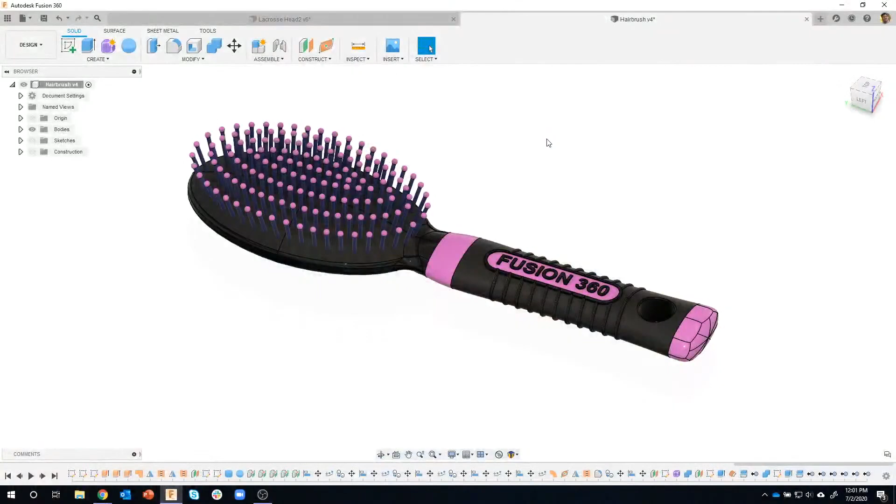So I'm going to be going through and showing some tips and tricks on how you can use pattern on a path. Now, I'm not going to be able to do the whole brush today. I'm going to focus mainly on the head, but just taking a look at the handle right now. Pretty simple shape, kind of an elliptical shape. You can tell I used a free form to connect to that.

And I'm actually basing this off of my wife's hairbrush. Hopefully she's not missing it right now and comes looking for it. But anyways, let's dive right in.

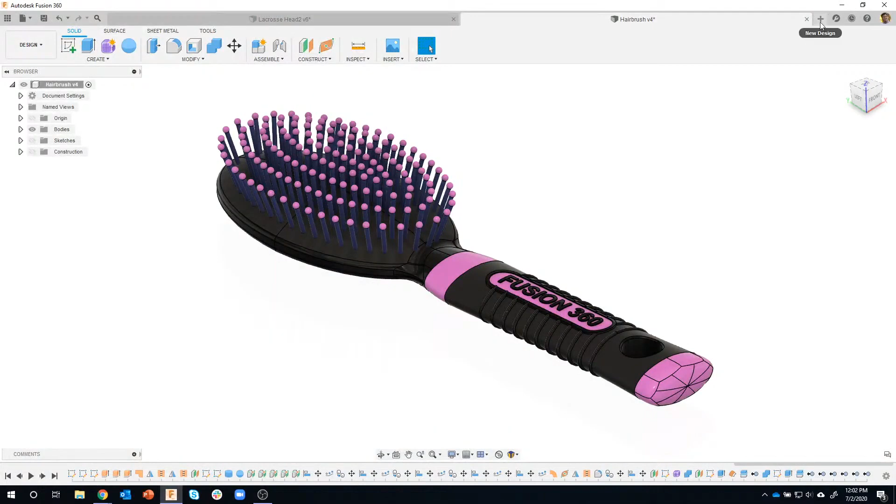So I'm going to start by creating this curved surface. It's a little hard to see because of the black, but I'm going to start by creating this curved surface. And then we're going to use that curved surface to help us define the direction of these pins. I'm going to call them pins. And you can see how they're perpendicular to that surface. And that's kind of the cool thing with today's project.

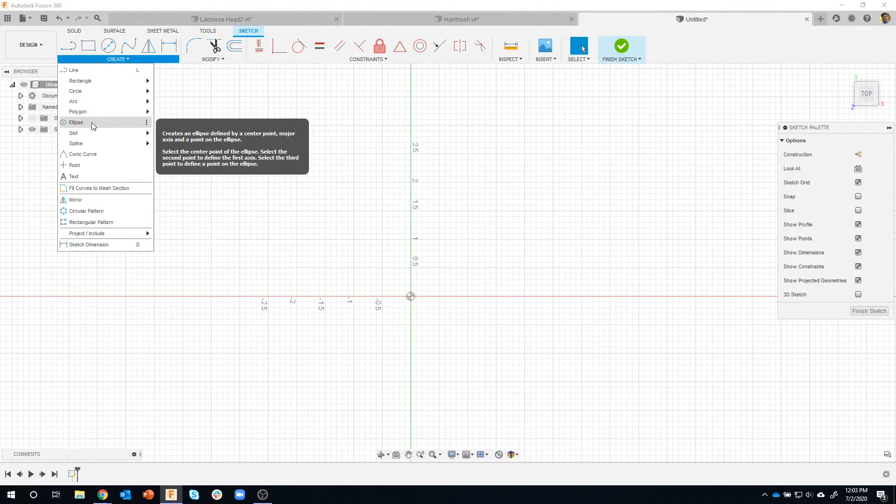Okay, so some of this is going to be similar, some of it's going to be new, but I'm going to start out by creating a sketch. And I'm going to start with an elliptical shape. Now, I don't use ellipse all that often, but in this case, the shape of the brush is an ellipse. So I'm going to start with the ellipse command, and it says place the center point. So I'm going to start here, and then it's asking for either the width or the height.

I'm going to go ahead and do the height, and according to my measurements, it's 4 1/4 tall. Then I'm going to hit the tab key, and you'll notice even though my cursor is way above this, it's basically asking for the angle of this ellipse. So I'm going to just click up here so it's vertical. And now as I move my cursor to the right, you can see there's the overall length of it. And now I can say it's 2.5 inches wide. So let me just move a couple of these dimensions so you can see what's going on here. So I created an ellipse, 4 1/4 tall, 2.5 wide.

Now, with this project, we're basically going to be working in one quadrant and then mirroring a couple times. So I'm only going to work in one quadrant. You'll notice that this is all one spline, or in this case, an ellipse. So I'm going to create some geometry that's going to help me split this apart. And you've seen me do this before. I purposely over-exaggerate. Instead of trying to draw a horizontal and a vertical line, I'm just going to do something like this. That way, when I come in and constrain it, I can visually confirm that everything's correct.

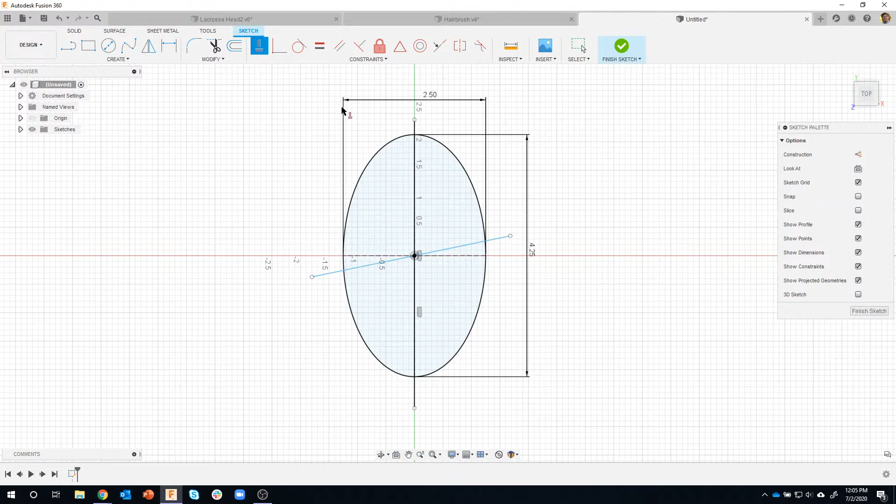So, for example, I want that line to be coincident with my center point, and I can visually see that it jumped to the center point. Same thing from there to there. I can see that it's now going through that, I shouldn't say center point, I should say origin point. Then I'll come in here and say horizontal, vertical. I'll click on that line and I can visually see that it's now vertical. Click on that line, I can visually see that that's horizontal. You don't have to do it that way, but to me it's confirmation that it was done correctly.

I can also see, if I expand my sketches, that these lines are black. And that means that they're constrained to the origin, for example. So I'm going to change these to construction geometry. Let me just make sure I get that line there. So now you can see that those are construction geometry.

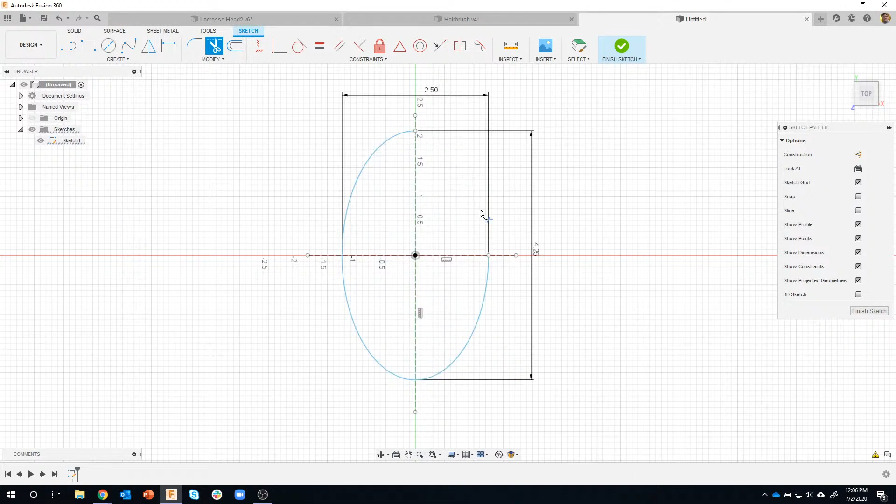Okay. So like I said, I need to split this, or we use the term break. I need to break this into quadrants. So under the modify command, there's a command called break. Now trim physically removes geometry. So if I came in here and said trim, it's going to physically remove that section. What break does is it just basically breaks it.

And you'll see, it's kind of hard to see, but as I hover over, you're going to see a little red X up here, and you're going to see a little red X over here. So I'm clicking on this segment, and notice it warned me that by doing that, we're going to lose some of our constraints, but that's okay. But now you can see that this is its own segment. If I come over here, you can see that it's 3/4 of a segment.

And what this did when I said break, it went to the next intersection basically, which is right here, and it broke it at that intersection, and it broke it at this intersection. So same thing right here. I'm just going to hover over this line. You can see the red X appearing in this area here. So I'll click, and I now have 2 segments.

So we're basically breaking it. You'll notice it's still a valid profile. I'm not trimming anything away. So I'll go ahead and break that segment there. I don't need to break this one because by breaking it here and by breaking this one up here, it became its own segment. Okay, so that was the break command.

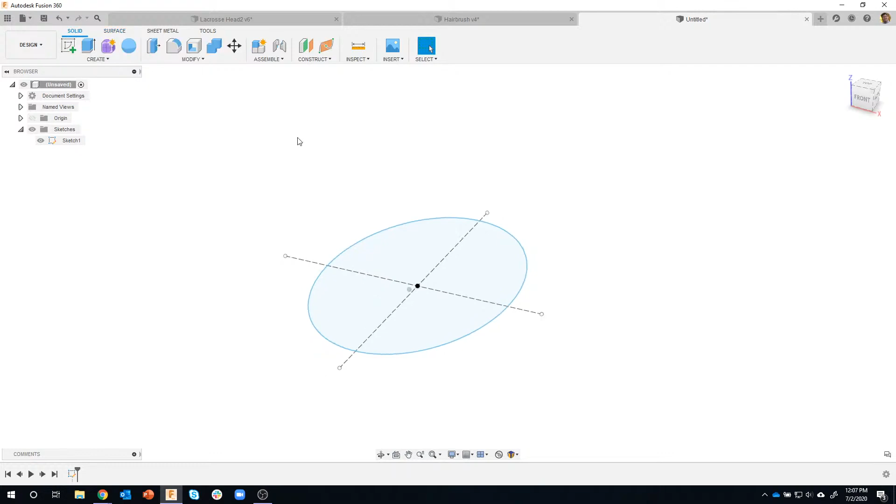Okay, so I now have the overall shape of basically the head of the brush. Now I want to kind of create the curvature. And to do this, I'm going to use surfacing. But I want to create some geometry that's going to help me create a nice surface. So I'm going to continue drawing some geometry here. So I'm going to say, let's create a sketch on this front face.

Okay, now here is where 3D Sketch really helps out. And let me show you why. I want to create a spline. So I'm going to go spline, and you'll notice that it's not snapping or catching to this profile because I haven't projected anything. There's nothing on this sketch. You'll notice if I turn off my original sketch, there's nothing there. So that's why it's not catching to it.

However, if I turn on 3D Sketch, it doesn't instantly put me into 3D Sketch. So here's one of my tips. I turn it on, I'm going to say Finish Sketch. Then I'm going to edit that sketch again, and you'll notice it's turned on. And now when I do the spline, you see this triad icon that appears, and that's a visual confirmation that I'm in my 3D sketch.

But check this out. Now notice it's actually snapping to this spline. Okay, I didn't have to project anything or anything like that, but 3D Sketch has some smartness built into it. So I'm going to get near this point, and you can see it turn to a square. So I know I'm at that end point right there. So I'm going to click there.

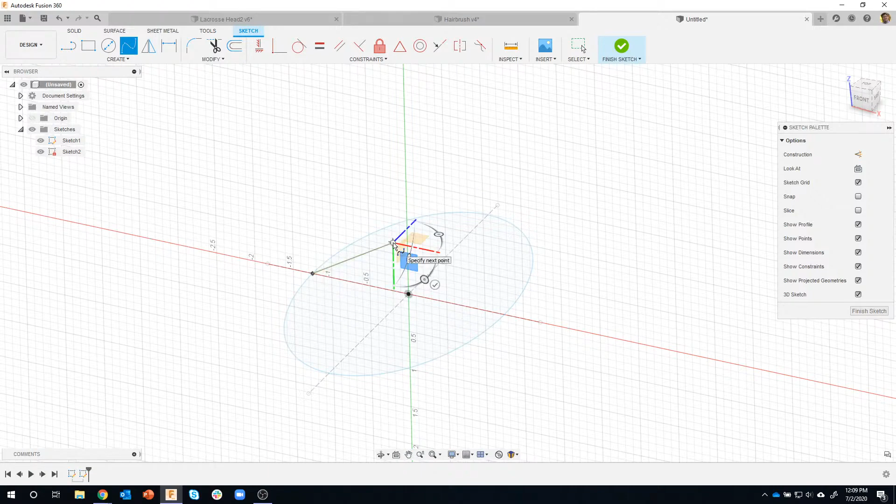And then I'm going to come over here, and again, you can kind of see it snapping to that edge, but I'm going to make sure I see that little square, and I'm going to go ahead and click there. Okay, and I'm going to say that I'm done. So what did it do? Well, it created a flat spline. I'm kind of looking down at the top of it on that plane, exactly from the edge there, exactly to the edge over there.

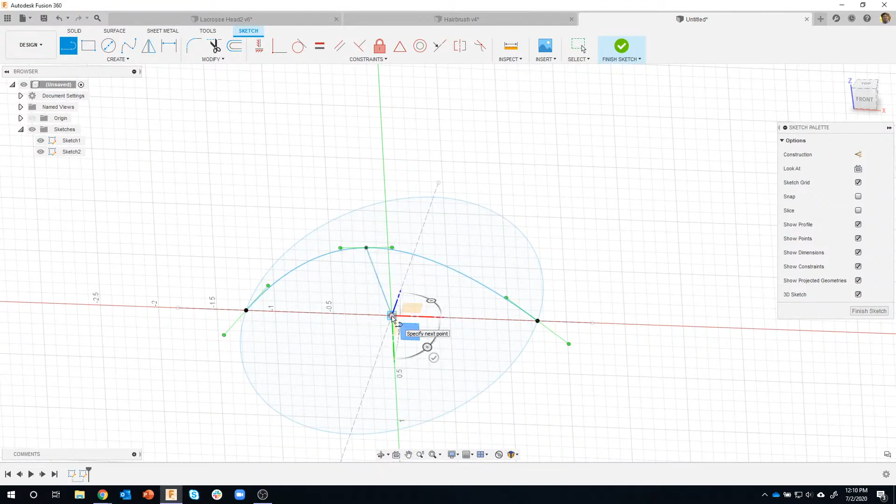Now I want to make sure that this point is straight up and down, so I'm going to use the line command. I'm just going to go from that point there to that point there. Okay. Done. Then I'll constrain this. I'll say I want that to be horizontal vertical, and watch what it does. See how it kind of moved over and that line is now vertical.

Now this is a pretty steep curvature to the surface, so I'm going to throw a dimension on here. Again, this is all just taking measurements off of the existing brush that I had, so this is supposed to be 0.35, and watch what happens to my spline. So you'll see it still is touching those corners, but it's now kind of more of a slightly crowned curve, okay?

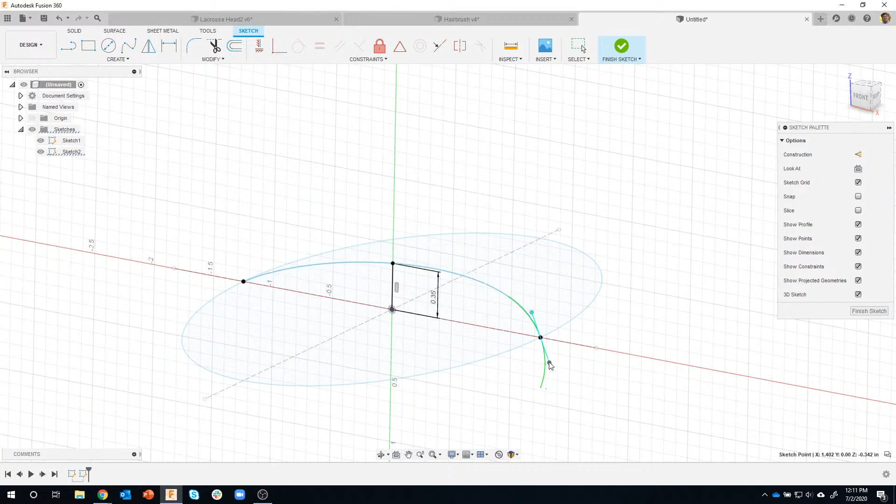Now these green handles here allow me to change the tangency direction and the tangency weight. You can see how this one slopes gradually to that point, but this one comes across and then steeply goes down. So you can control the weight, which is how strong the tangency condition is.

And believe it or not, you can actually dimension, for example, from this edge to this edge, and say I want that to be 45 degrees if you wanted to. In this case, I'm not going to. I'm going to leave everything just default, the way it was. Let me make sure, undo.

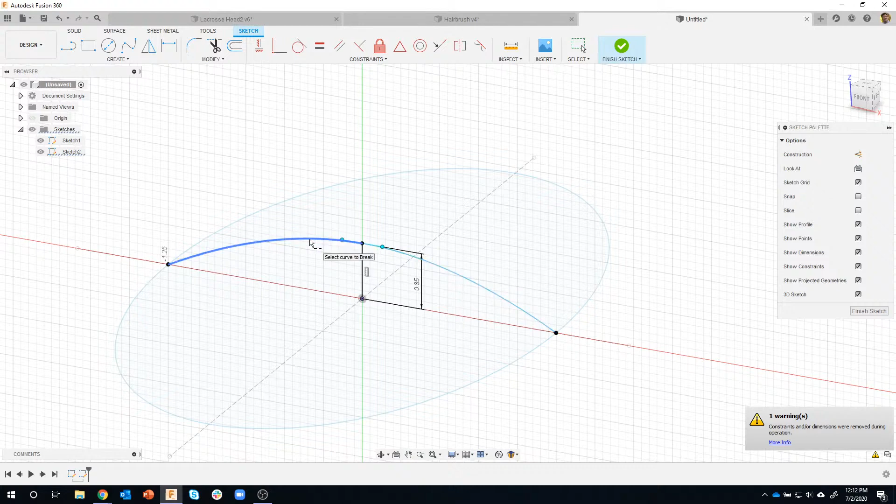Okay, so I also want to split this spline, because you'll notice it goes all the way across, and like I mentioned, we're only going to be working in quadrants. I should quit using the term split, I'm going to say break. I hover over this line and you can see that little red X appear, so I'll go ahead and click that. I've now broken this spline into 2 segments.

Okay, so that's going to define the curvature in one direction. I also want to define the curvature in this length direction, so pretty much the same thing. I'm going to create a sketch on this front face.

I'm in my 3D sketch, so what I can do is come over here and you'll see it turn to like a square, so I'll go ahead and click there. Now I do want to make sure that I catch this point right here, so I'm not going to randomly go somewhere else. I'm going to go there and click, so my spline will go through that point. And then once again, I'll come over here, wait until it turns to a square, and say OK.

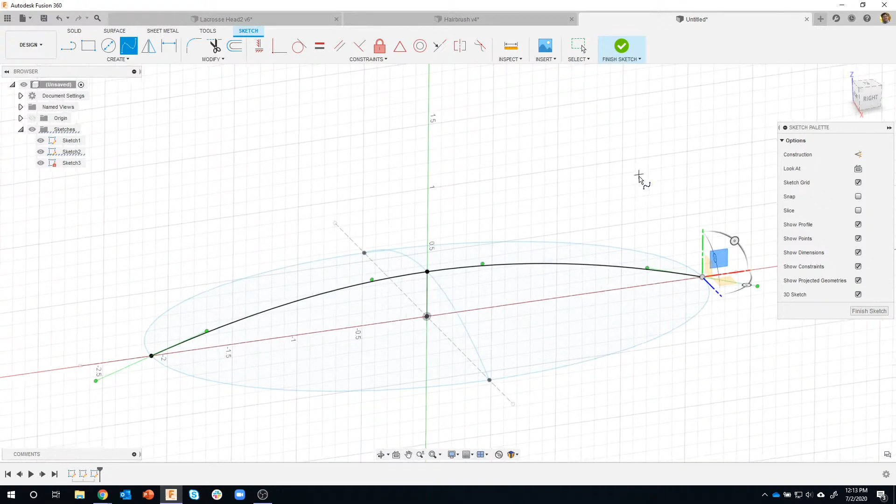Okay, now I need to break this spline, so I'm going to come in here and say break. But watch what happens when I hover over this line - I do not see the red X.

Okay, so I'm going to do something a little bit fun here. Pop quiz: if you think you know why, throw it in the chat real quick, you don't have to be lengthy. Just, why do you think the red X is not appearing when I'm doing this break? I'm going to pause for about 10 seconds here, let you guys throw your answers out there. Does anybody know why it's not letting me break this?

So Al said no point at the top. Joel said there's no intersection. Fred said it's a bug - nope, it's not a bug, I can prove that. Joseph said, I always make the mistake of clicking and not escaping after the spline. Angelo says he knows why. Chris, I'm going to give you the gold star for the day - he said vertical line is in a different plane. Somebody else said because it's in the other sketch. You guys are too smart, you shouldn't be watching my live streams, you know all this. So that is exactly correct.

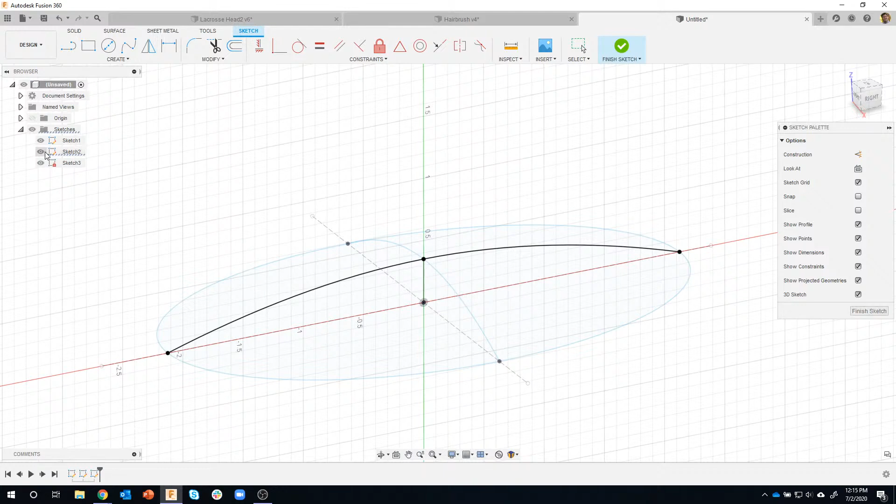Let me show you what's happening here. So I'm trying to break this line, and I see this line right here, okay? However, that's on a totally different sketch. In fact, if I turn those 2 sketches off, you'll notice there is no line right there for it to use to break. So yes, you guys are absolutely correct.

There was no intersection point, nothing for it to stop at, because break basically goes to the next boundary, and there wasn't one because it was on a totally different sketch. So the next boundary is way over here, so there was nothing to break. So yes, you guys are awesome.

So how could I do this? Well, let's just go ahead and project onto this sketch that line. So we're basically projecting this line from sketch 2 onto sketch 3. Watch, I'm going to go ahead and click this guy, I'm just doing the selected entities. I'll say OK, and now if I turn off those 2 sketches, I now have a line or a boundary.

Okay, so let's see what happens if I try the break command. I like James, he said it was a human bug - yep, it was my fault because I hadn't projected it. So human bug. Now notice I'm hovering over this section and there is that little red X right there, so I'm able to break this into a separate segment.

Now, why am I really highlighting this? This happens to me a lot, and I also take quite a few calls from customers where they're like, I go to extrude and half of my geometry isn't a valid profile.

It's because it's actually on a different sketch and they didn't realize they had created a third sketch or something like that. And when they go to extrude, sketch number 2 and sketch number 1 aren't active and they're not being extruded. I highlighted this because I run into this a lot too.

Okay, so I'm going to go ahead and finish the sketch there. So what have we done here? We've basically started to create what almost looks like a surface so far. These are the wires, like if you were making this out of fabric, and these were just thin pieces of metal, you could lay a piece of fabric over this and it would create a nice looking surface.

Okay, so I'm going to switch into the surface tools. Now I'm going to show a couple tips. Some of these tips are from one of my coworkers who's really good with surfacing. I'm not much of a surfacing person, so I'm going to pass on these tips and show you why, but I'm not going to go into too much detail because mine's more about pattern on a path than it is about creating surfaces.

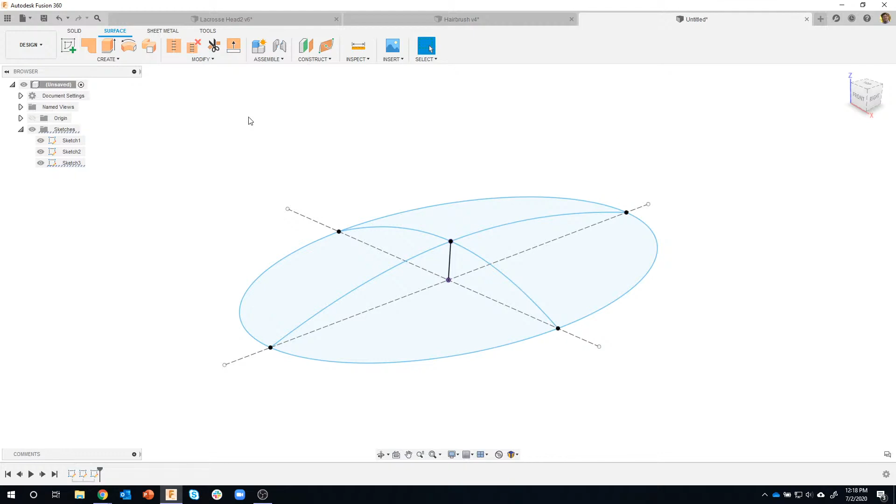But let me show you an example here. I'm going to come in here and say create a patch. It basically allows me to specify a boundary and it's going to fill in. So watch, I'm going to say patch. Notice because we've split this, I can click here, click there, and click here, and I get a surface. It's like a piece of paper or piece of fabric being created by those 3 lines.

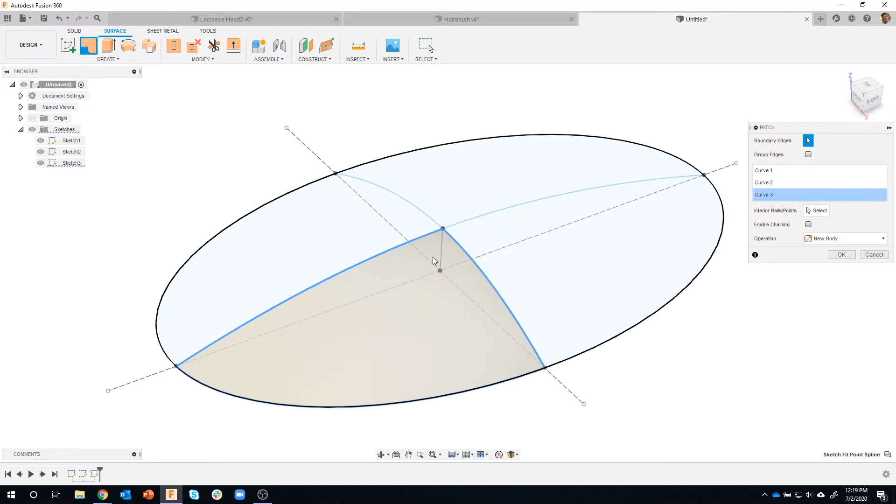I could even specify an interior rail if I wanted to, but the key thing I wanted to point out here is notice it says curve 1, 2, and 3, but there's no options here. It's literally just filling that area in with a surface, with some material or whatever. So keep that in mind. I'm going to cancel out.

So here's the trick that he showed me, which I think is pretty cool because it gives you more options. It takes more steps, but it gives you more options. I'm going to come in here and say extrude. Now watch what happens when I hover over this edge - it highlights the whole edge. And you're probably saying, well, didn't we just spend 15 minutes splitting those edges or whatever?

Well, it's because this chaining is turned on. So I'm going to turn chaining off. And now you'll see it's its own edge. I'm going to grab that edge and just drag it some random distance - it does not matter how far. I'm just going to extrude that edge back. Now if I expand open my bodies, you'll see there's a little surface right there.

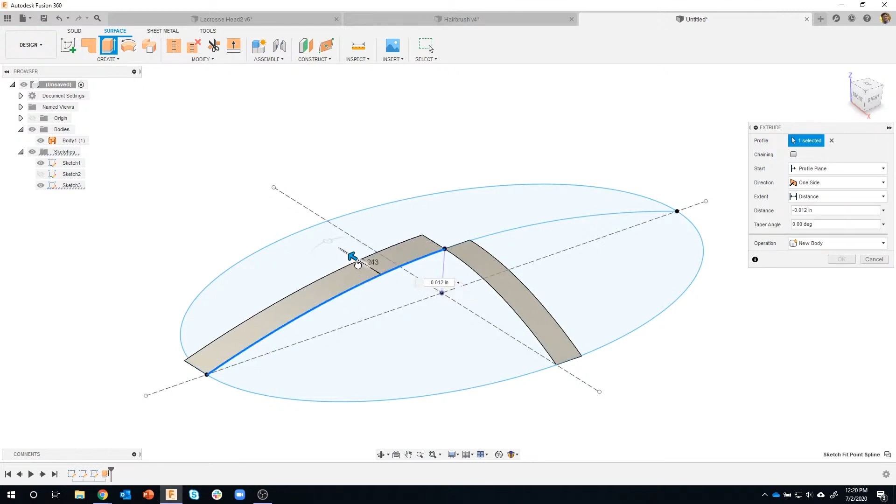I'm going to continue doing that with these 3 quadrants, these 3 edges. So I'm going to extrude an edge back that way. And then I'll also turn off my chaining, extrude this edge down. So what did we do here? Well, we basically created some kind of a boundary, but now there's surfaces that are going to be touching that. So watch, I'm going to do the exact same command.

I'll come in here and say patch. Okay, what are my boundary edges? So I'm going to say that edge there, and this edge here. Now notice they're labeled - even though I clicked this one last, it says this is edge 1, edge 2, and edge 3. And it looks pretty similar to what I created earlier, okay, but notice the options that I have.

So edge 1, I don't want to mess with. In fact, I'm going to purposely mess with it to show you what these options are. It says connected, so there's G0 continuity. It basically means this surface is touching or connected to this surface, okay.

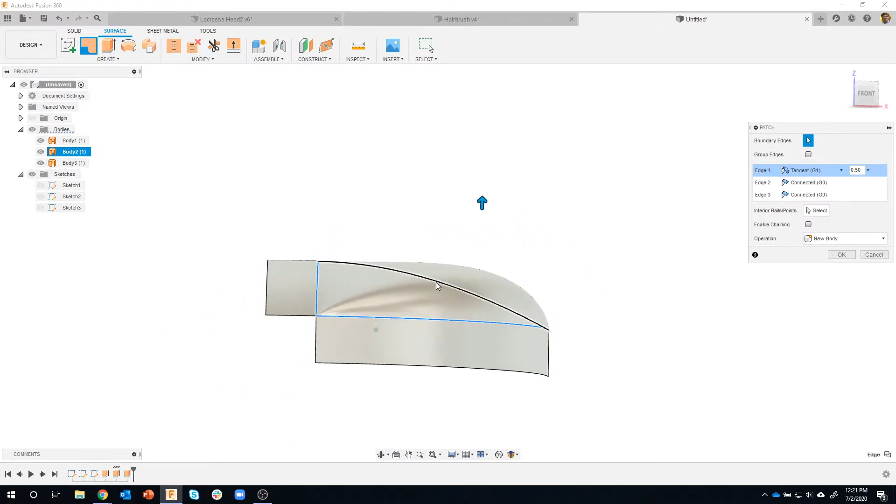Well, if I came in and said, you know what, I want to make that tangent, look what it does. In fact, I'm going to rotate to the side. You can kind of see it's really having to modify the shape of this, but it's basically taking that surface and making it tangent to edge 1. So it gives you a lot more power.

So for example, I could say I want edge 2 to be tangent, and you can't really see much happening, but what it's going to do is smooth this out and end up being tangent with that surface. Whereas when we just did the 3 edges by itself, there was no tangency control or connected control or curvature or anything like that. And you can see you actually can change the weight of this if you want to.

So I could come here and make both of these surfaces tangent, and it's going to create a much nicer looking surface for us.

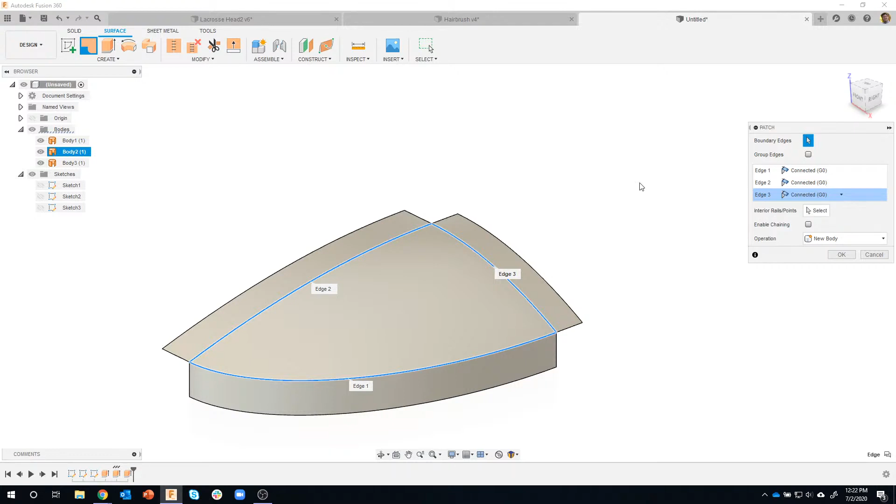Now in this example, I'm just going to leave everything connected. I don't want to worry about tangencies or anything like that right now, and you'll see why in a little bit. But I wanted to highlight that because Jeff Smith, who's on our team, showed me this, and I thought it was a really cool tip.

Okay, now you'll notice I have all 4 of these bodies. I'm going to turn off the ones I don't need, and so I'm left with this one little patch, basically. Well, because everything's kind of symmetric, I could come in here and say mirror.

What do I want to mirror? I want to mirror that body. What's my mirror plane? Well, because I created everything at 0, 0, I can select this vertical plane right here, and you'll see it's going to mirror along that plane.

But watch what happens over here when I say okay. It is now 2 separate bodies. I want to stitch these together.

Another tip that Jeff gave me was stitch as you go. So instead of doing all 4 of these and then stitching them, he recommends stitching as you go. So I'm going to go ahead and say I want to stitch that surface to this surface. We're basically sewing it together.

You notice how the edge turns green. It obviously can't stitch these outside surfaces, there's nothing for it to stitch to. So I'm going to stitch that together, and you'll notice we're back to 1 body.

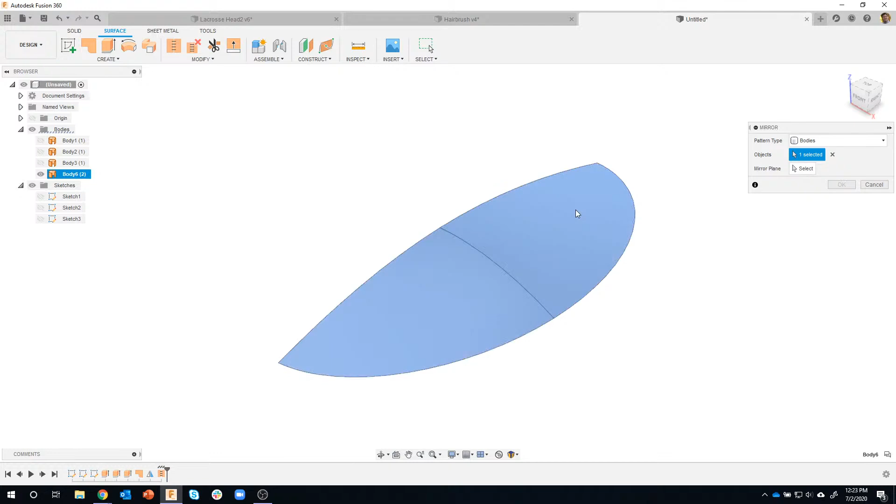Then I'll go ahead and mirror this one more time. Notice it's 1 body. What's my mirror plane? That guy there. I'll say okay. We'll stitch that one to that one. You can see the green line, which is good. And we are back to 1 surface body.

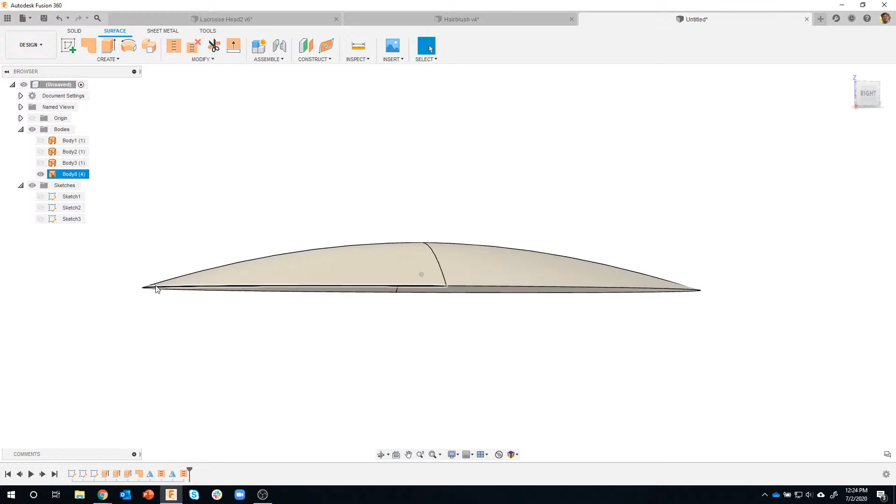Now, I told you earlier I don't care too much about the tangency conditions or anything like that, because we're basically doing pins along a path. If I were building this as an actual surface, I would probably spend more time with the tangencies, and might control the angle that this slope comes into this edge, etc. But that could take a whole session just on surfacing, so I'm keeping this fairly simple.

So the next thing I want to do, now that I have the basic shape to put all of my little pins, I need to create some paths for those pins to follow.

So I'm going to do an offset plane. I'm going to offset this horizontal plane, which is way down here, and just bring it up some distance. It doesn't matter, I'm just making it above my object. And then I'm going to create a sketch on that plane.

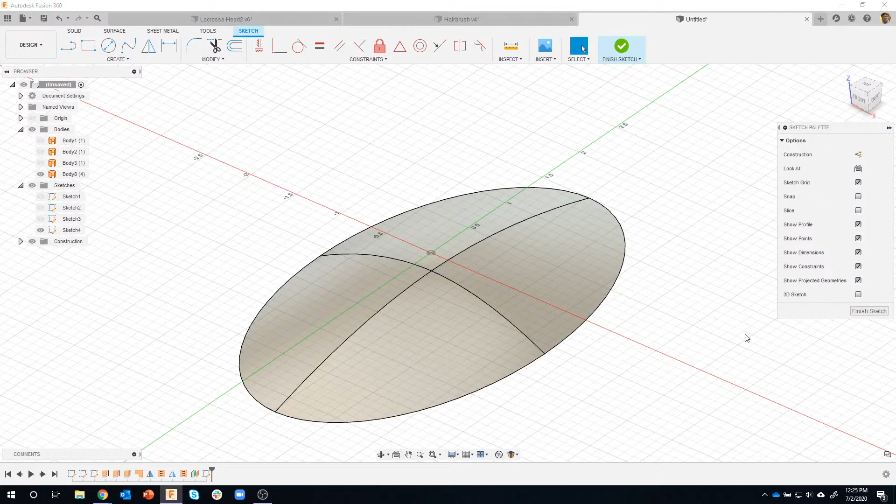Now you'll notice my screen did not go orthographic like it usually does, and that's because I'm still in my 3D sketch. I'm actually done with what I need 3D sketching for, so I'm going to turn that off. You'll notice nothing really happens, so I'm going to say finish sketch. I'll come back into that sketch, and now you'll notice it's orthographic. It's not going to have that triad anymore that gets in the way that you usually see with 3D sketch.

Okay, so I want to create some equally spaced elliptical paths for these pins to follow. So I'm going to project, P for project, and you'll notice right now it's on specified entities.

So I could project each quadrant, or pick this edge, then this edge, then this edge, but that would take some time. Or I could say bodies and watch what happens—it's going to basically do like a silhouette of the whole body. So when I click on that and say OK, it projected all of those edges for me in one click, instead of me doing it manually, click after click after click.

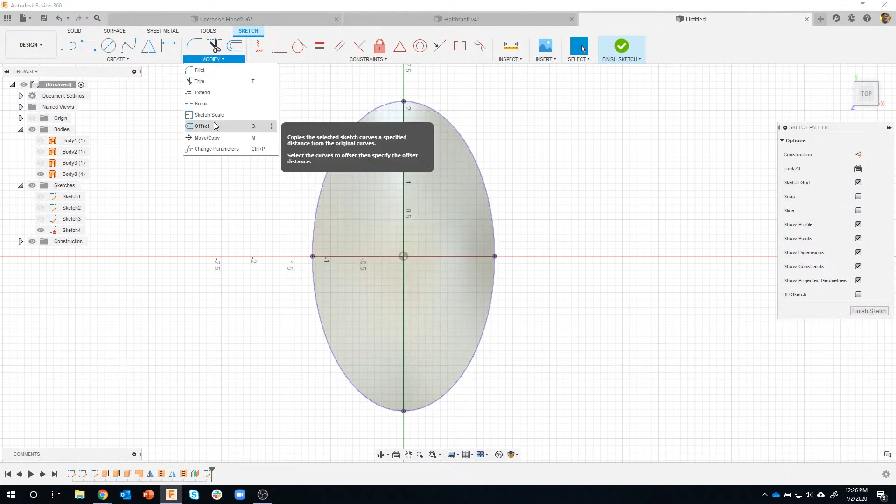So that was this bodies option in project. By default, it's usually set to specified entities. Okay, cool, so now I have this shape. I'm going to use the offset command in Fusion.

What is the sketch curves? Notice it's all one curve. I want it to offset in 0.25, let's say a quarter of an inch. And you can see that sure enough, it offset that ellipse a quarter of an inch.

You can't use pattern to do this, so I'm going to use offset again. You'll notice if I try to offset this line, it says one or more of the curves has already been offset, consider offsetting the original profile again. So this is something with Fusion: you can only offset the original. You can't offset an offset, or offset two offsets, or whatever.

So I'm going to offset this guy, and I'll say let's go 0.5. You can see I get that result. I'll click on here again and say let's go 0.75.

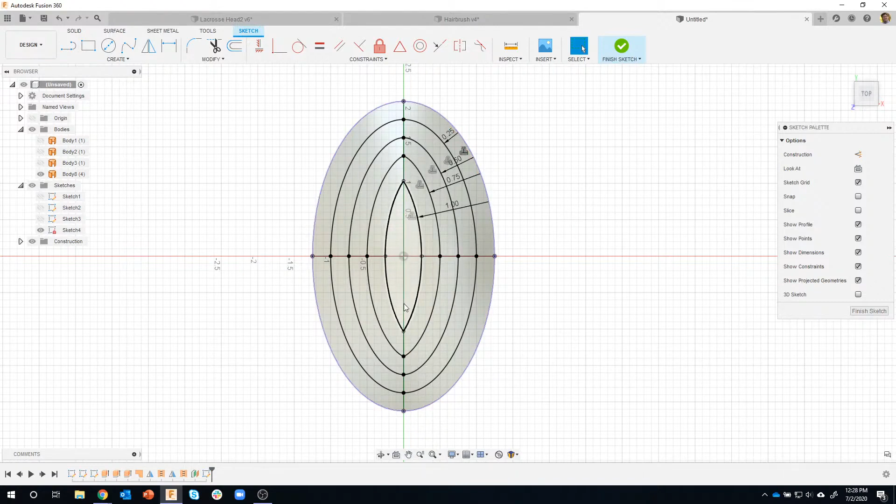So I'll come in here, let's do this one, I'll offset that one. And then there's a row that's just a single line basically right here. So I'm going to draw a line, again kind of some weird shape like so.

I'll make it vertical, and I'm going to say I want the midpoint of that line to be at 0,0. So now if I were to change the length of this line, you can see how it's constrained and it's equal and all that kind of stuff. So I just created a line, made it vertical, and then made the midpoint be right there at the center.

Okay, so if I rotate this now, you can see that we drew all of these on a flat plane above this surface. Now there's a really cool command in project. We usually use this project right here, but notice there's one in here called project to surface. Now I'm going to purposely make a mistake here because this happens a lot.

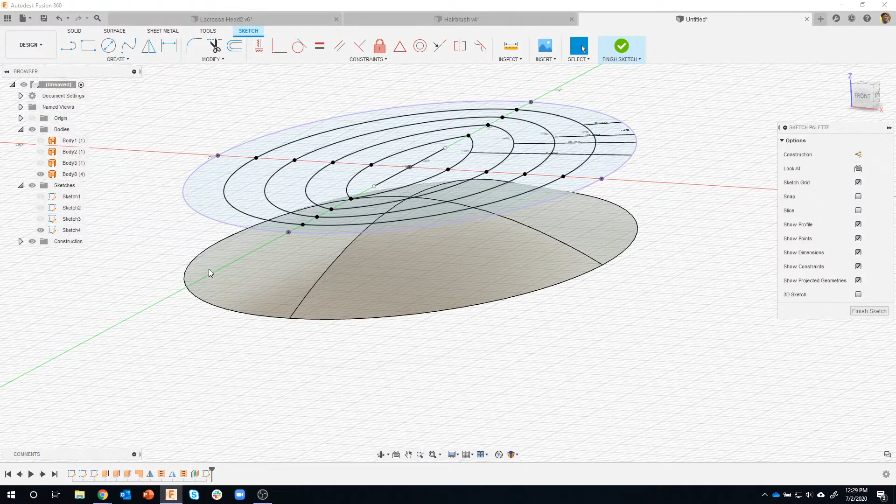You might get this error message, and I'm going to explain what it means. So I'm going to say project to surface. It's asking what face, so I'm going to go ahead and select one face. And then it's asking for a curve, and I'm going to go ahead and click on this curve.

And then finally, notice here's the warning: no support for projecting sketch geometry into the same sketch, please change the target sketch or geometry. When I first saw this, I'm like, what does this mean? Well, basically what we're trying to do here is we're using this geometry and we're wanting to project it onto a surface here.

So what it's saying is you can't project this onto the same sketch. So I'm going to say finish sketch. Then I'm going to create a new sketch, and it doesn't matter where. I'm going to again click on this bottom plane, it really doesn't matter in this case.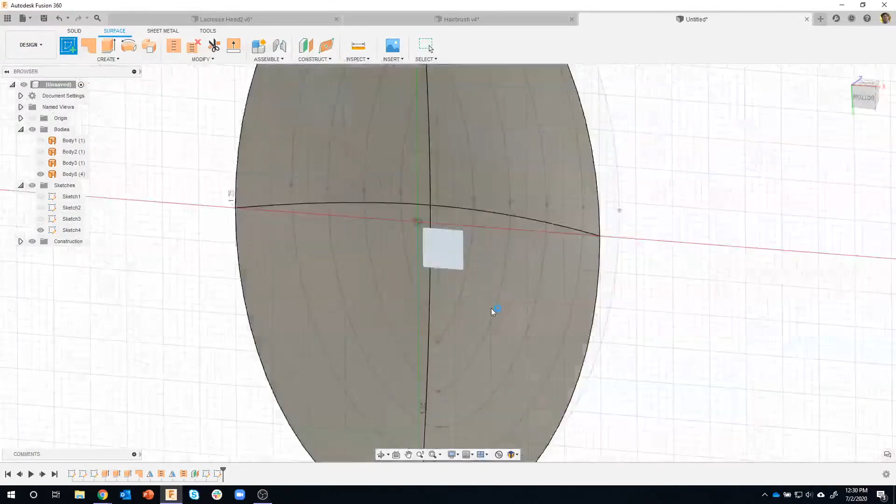Then I'm in my sketch. You'll notice I now have two sketches: sketch 4, which is all of these little rings, and then sketch 5 is this new one. Now I'm going to say project to surface. By default, it's usually set to closest point.

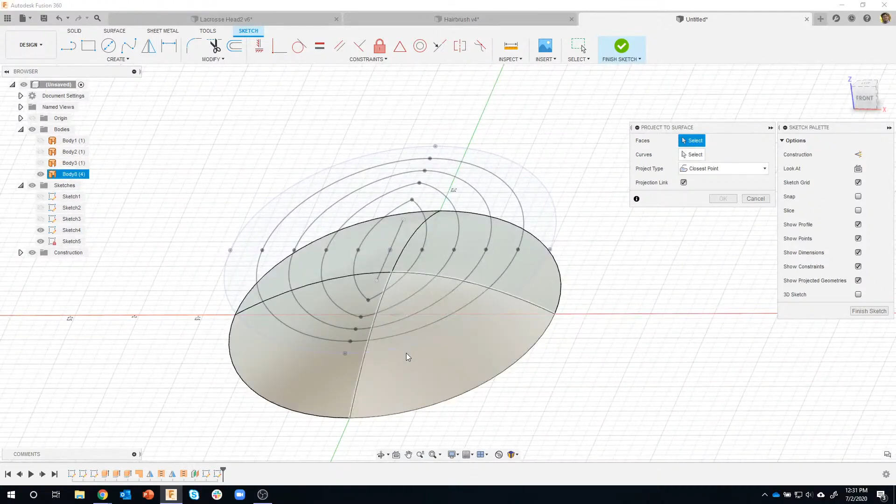Now that works great if your stuff is planar, and what that basically means is it would take this curve and try to get it to the closest or shortest distance to that surface. So that could be, it's hard to point out, it could be in this direction here, it could be in this direction here, who knows. Well, I want to basically project this down, almost like we're wrapping it onto the surface.

So I'm going to change my project type to along vector, and this is going to allow me to specify which direction. You'll notice it says project direction, and I can click on, let me zoom up here just a little bit, this vertical axis right here, this blue line. I'm going to click on there, and you can kind of see it gives me an arrow preview that the lines are going to project in this direction until they hit a surface.

So what are my faces? I'm going to click these 4 faces. What are the curves? And check this out, I'm going to go ahead and click on that edge right there, and you can see that sure enough, it projected it straight down onto this curved surface.

So I can go ahead and click around so you can kind of see, I'll do that, and I now have a ring. Let me look at it from the top. You can kind of see it follows that path, but it's on the surface of this part right here.

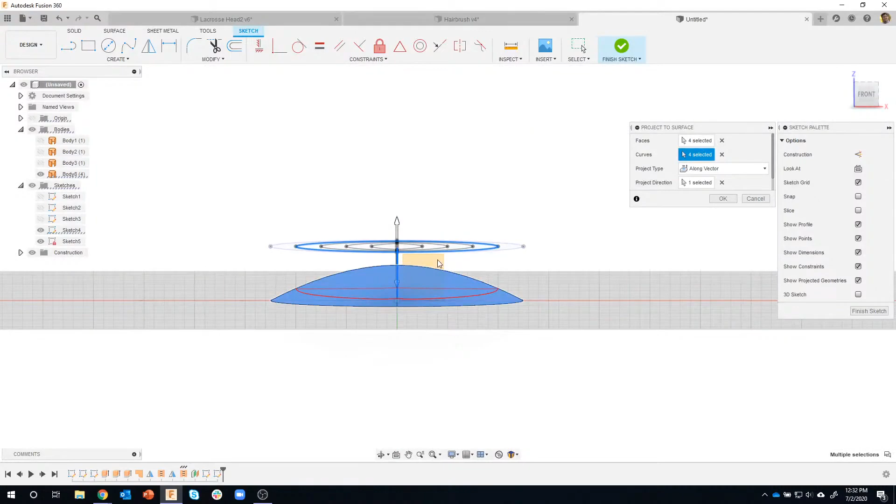And you can kind of see how it changes as it goes around that surface just due to the length and width and stuff. So I'm going to go ahead and continue. I'm going to click around. And again, because these are split, that's why I'm having to do these in 4s basically, but I do need the full path. Okay. So I got that guy, so I need to do this guy, that guy, and this guy, and then finally that line through the center.

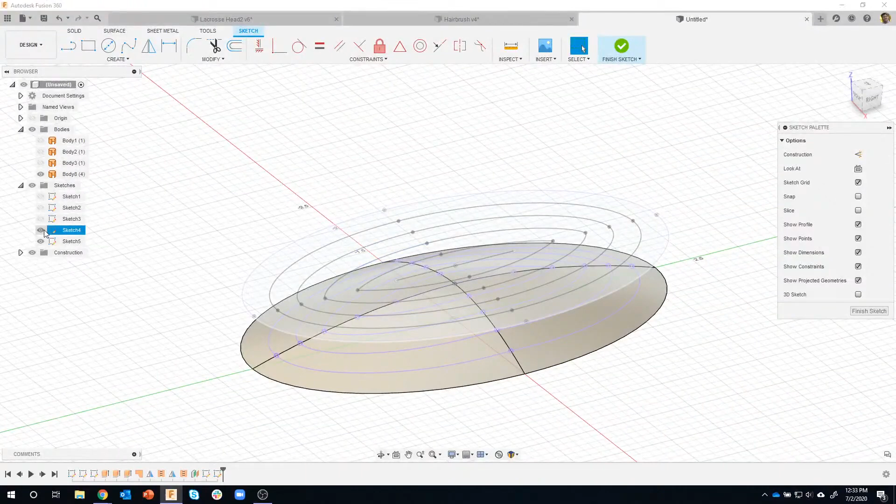And now you can kind of see the curvature of this. They all match looking down from the top. Pretty cool. Okay, so I use that along vector a lot. It's a pretty neat project to surface along vector. Okay, so a little confusing here, so I'm going to turn off Sketch 4, and you'll see that Sketch 5 is actually a 3-dimensional sketch, basically. It's kind of a 3D sketch.

Okay? Cool. So we now have the surface, we now have the paths that we want to use. What we need to do now is create the object that we're going to pattern on these paths. So I'm going to say finish sketch, and I'm going to switch back to my solid, and I'm going to just create a cylinder primitive because these pins are basically just a cylinder with a round head, and I'm going to show how I did that.

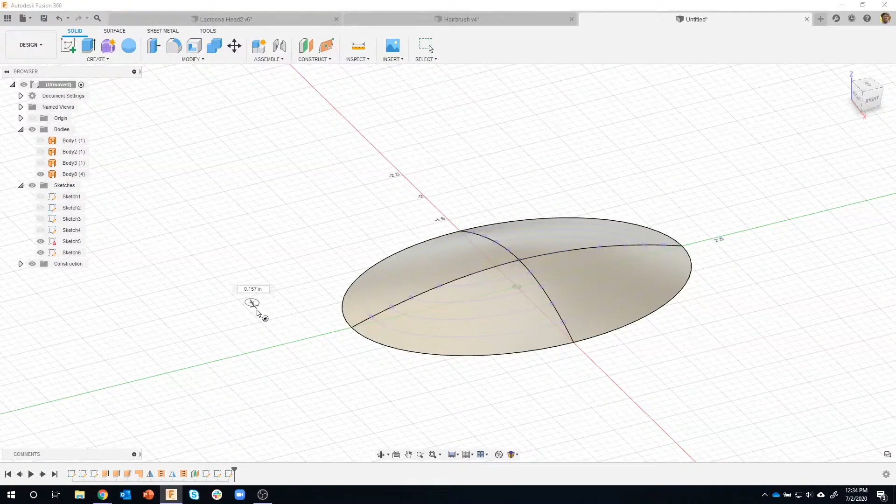Okay, so I'm going to create a cylinder. I could create a sketch, I could draw a circle, I could then go to extrude, but if I just go to cylinder, it's going to allow me to pick a sketch plane. Let's just do that guy there. I'm just going to draw it out here in space somewhere. Okay. Now these are pretty small. In fact, they're 0.066 in diameter.

Okay. And then so you can see 0.066 in diameter, and they're 0.55 inches tall. And you'll notice it says new body. I'm going to go ahead and say okay. And I just quickly created a cylinder that's 0.066 in diameter and 0.55 tall. Now I want to put that bead or that ball on the top. So I'm going to zoom up on this guy, go to create, and I'm also going to create another primitive. I'm going to create a spherical primitive.

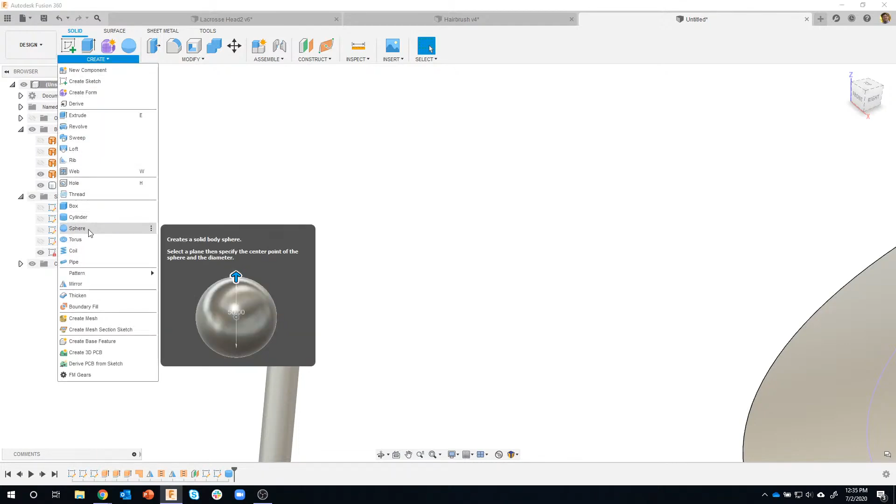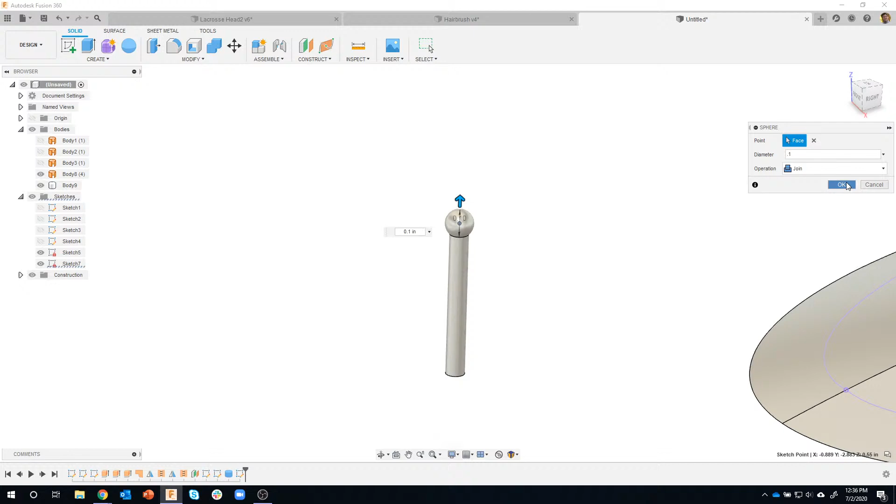Okay. It's going to ask, where do you want to create it? Well, notice I can click on this face. And then if I get near the center, again, it's kind of hard to see, but it kind of snaps to that little round icon right there. And by default, it wants to cut, okay? So you can kind of see that. But in this case, instead of cutting, I want to join. And it's going to basically add a sphere on here. In fact, let's make it, I think it's 0.1 in diameter. Let me zoom out just a little bit, and you kind of see I quickly was able to create that head on the pin.

Okay, here's another tip. When you start patterning things, think ahead a little bit, especially if you want to apply materials. You'll want to do it to the main part, and then when you pattern that, they'll all be that same color. If you just pattern it right now and then you come back and say, okay, I want to make them blue, you have to physically click every single one, which takes some time. So I'm going to go into my appearance. So I think under modify appearance, I always use the A key, the shortcut key. So for example, I'm out here in space, I just hit A, and you can see it brings up my appearances. Okay, so here's my default appearances.

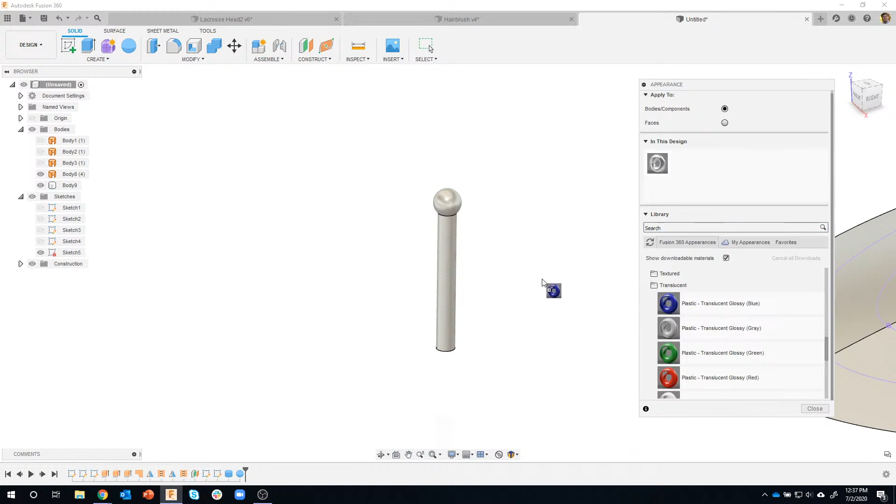I'm gonna just go into plastic. You can see all the different kinds of plastics we have in there. And I'm just gonna do a translucent plastic. Now I want these to be kind of a dark black, but I want them to be glossy. And you can see glossy blue, gray, green, red, etc., white, but you don't see a glossy black. So I'm just gonna drag this blue onto this body, and here's another tip that's coming up. I'm gonna drag it onto the body. So I'm gonna drag this over here, and you can see the whole thing, the whole body turned blue.

I'm going to show you how we're going to just change the head of the pin here in just a minute. Okay, so let's right click and edit. And this will allow me to change the color. So you can kind of see I can just drag this guy around, and I'm going to bring it down to a fairly dark. It doesn't have to be perfectly black, but I might do like a grayish black, like so.

And say done, and you'll see that the icon kind of changed to, even though it says blue, it's kind of a black color. Okay, well I want this to be kind of a purple or magenta color, and again I don't see a purple or magenta in here. So I'm going to change this to faces, and I'm just going to drag red and drop it on that face, and you'll notice that it only applies the material to that face. Okay. If you forgot and did it to bodies, it would turn the whole thing red.

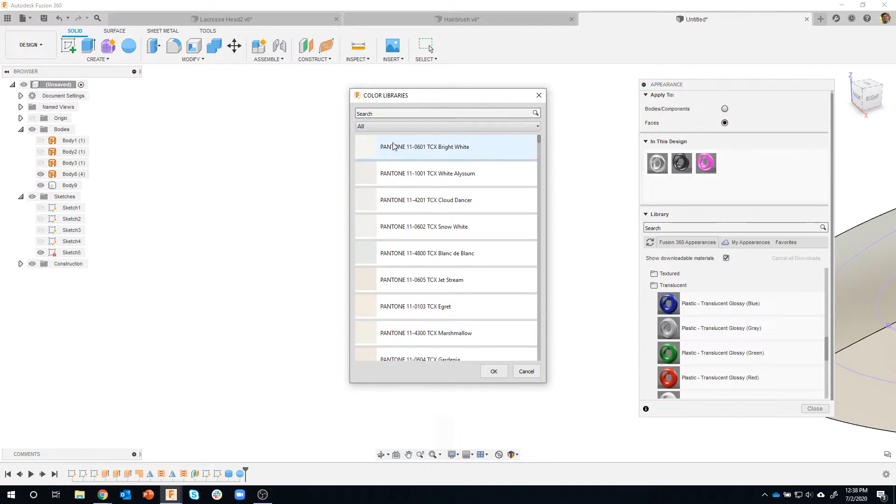Okay, so I'm going to right click and edit this guy, and I said I want it to be kind of a magenta color, so I'm going to drag this slider over here. I can change the color just by dragging this point over here. Here's another tip that not a lot of people know about, this color library right here. These are all your Pantone colors, so you could actually search for, for example, violet, and it's going to show all of the different colors that have violet in it.

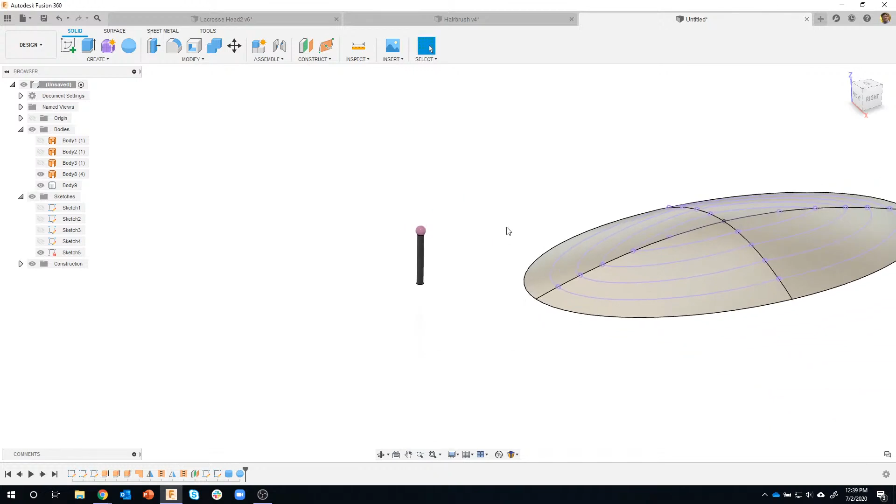So I'm going to go ahead and say that guy there, and it will use that particular color, you can kind of see it pick that one right there. So if I were to do violet quartz, for example, you can see how that's much darker. Oops, didn't mean to duplicate it, sorry. Let me edit that. So again, that's the Pantone colors if you want to use those. So I'll use that one there, looks pretty good. And there's my single pin. In fact, I'm going to rename it to pin.

Okay, hopefully this is going good for you guys. I can see Angelo's talking and answering questions.

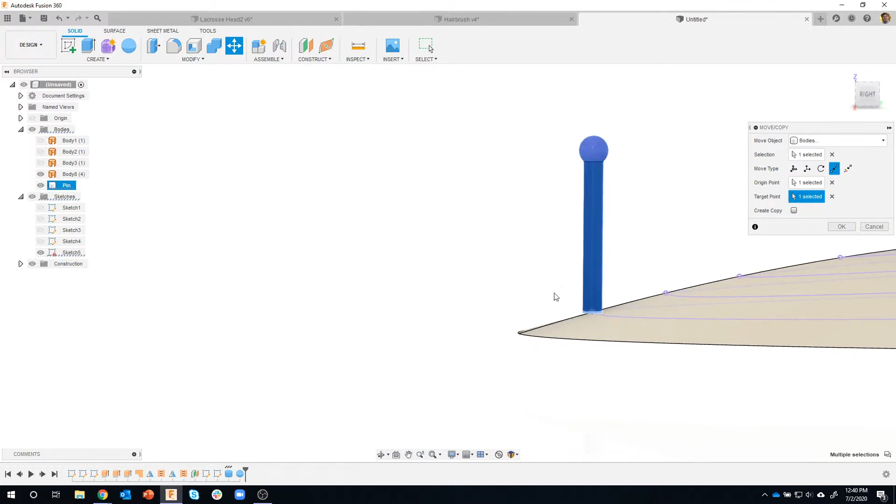Okay, so now I need to align this pin to be perpendicular to this surface. And if I just came in here and said move, from point to point, for example, I'm purposely making a mistake. I'm gonna go from there to there. It moved it, but you'll notice it's not in the right direction, and I would have to rotate and figure that out. Well, of course, we're not going to do that. We're going to let Fusion do the hard work. So I need to somehow align this at a very particular point on this transitional surface here.

So I'm going to build some axes, okay? And one of them is axis perpendicular to face. I want it to be perpendicular at a point. Now you'll also notice it says axis perpendicular at point. I don't use this one as often because basically what it allows you to do is you can just click somewhere on that face, and that's where it's going to put that axis, and I didn't get to specify a very specific point. However, axis perpendicular to face, it says what is the face?

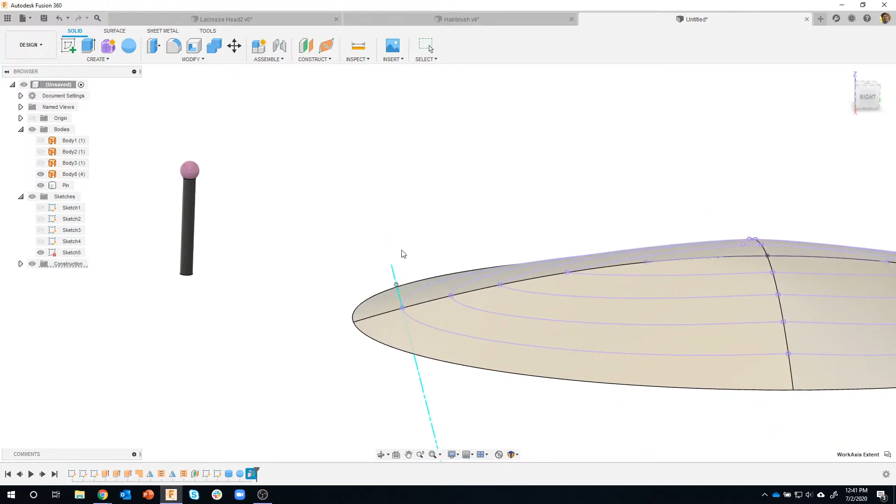So I'm going to go ahead and click on that face right there. Now it's asking what is the point? And I'm going to click that point, and notice what it did. It created an axis that's perpendicular, 90 degrees, at that point. It's a really cool option. Now, also, new little tip, if you didn't know this, you can change the length of your axes just by grabbing the endpoints. And as I go through, you're going to notice that some of these axes get kind of weird. So I'm going to do that again.

Axis perpendicular to face at a point. I'm going to click on that guy there. And I'm just going to repeat this a couple times. At that point there, see, like what I was talking about, this one, for whatever reason, gets really long. I'll repeat just by clicking and dragging my right mouse click straight up. So that face, that point, and then finally that face at that point, and it put it underneath, it looks like. Okay, so I'm going to fix a couple of these.

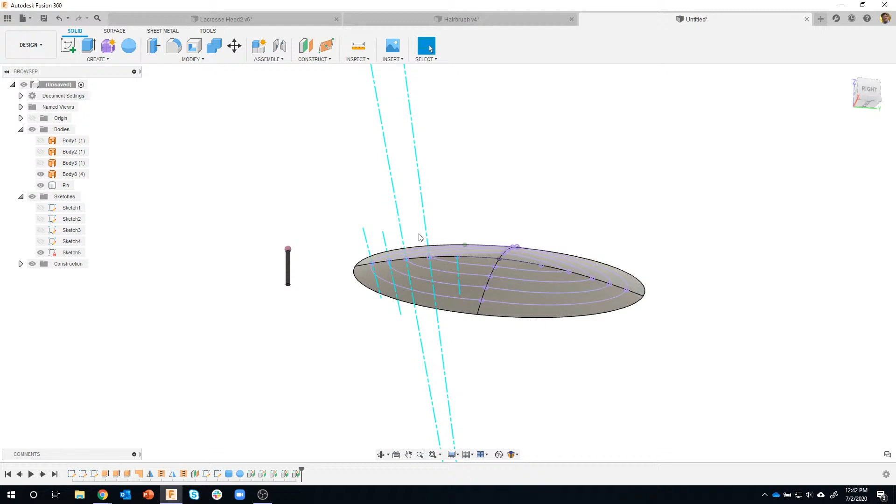I'm going to drag that point up. I might drag these points down. They don't need to be that. I mean, you could leave them that way if you wanted to. To me, it makes it harder to fit your screen when there's extra geometry. And then same thing with this guy. Oops. I'm going to turn off the body to help me with this. I need to make sure I'm grabbing that point right there. Okay, so now I have these axes.

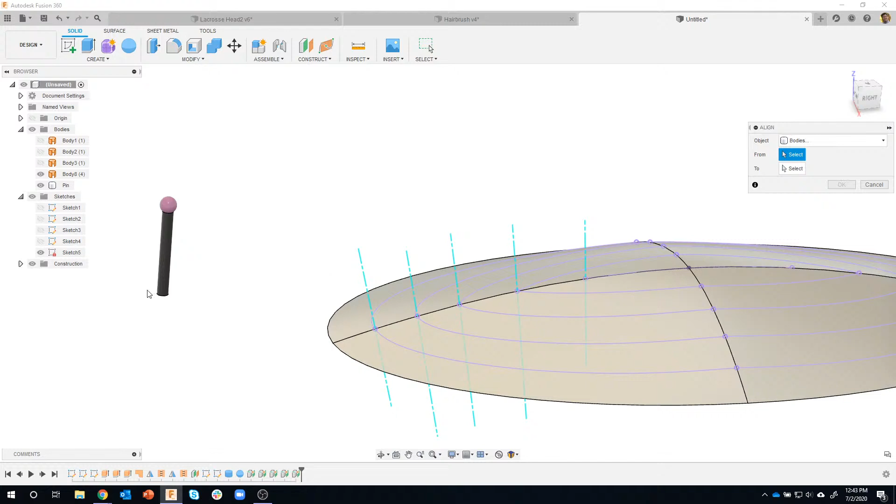Okay, we're going to use the align command. This is really powerful. So I'm going to say align. What do I want to align? I want to align this body. Now notice as I hover over it, it's almost like creating an assembly joint.

You can kind of see these little tick marks. So I want to grab this bottom tick mark, okay, and I want to align it to this line, and watch what happens. So you can kind of see how it lined that up, and it's on that axis, perpendicular to the surface, but you'll notice it's not in the right location, okay? And you'll notice it doesn't let me position it. It only aligns it, okay?

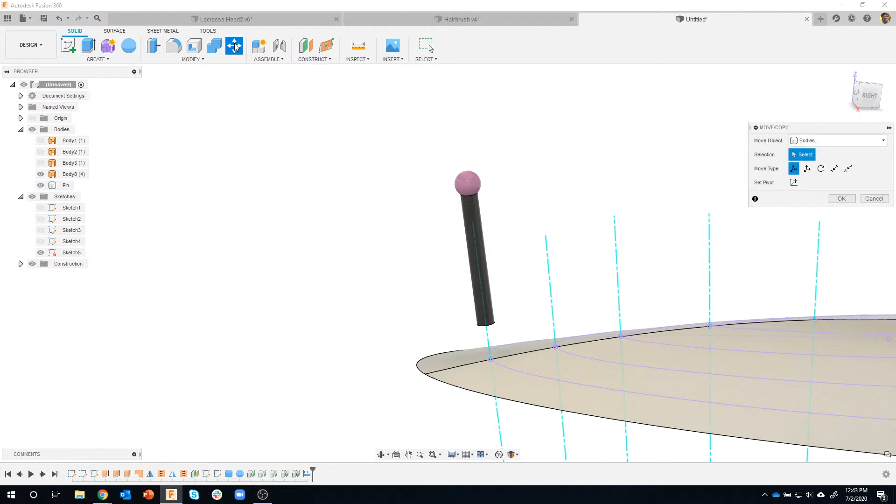So I'm going to come in here and say move. And I want to move this body. Now here's another tip. You'll notice as I hover over this sphere, my arrows kind of point randomly in different directions. But if I hover over the cylinder, you can still see that the arrows are kind of rotating around, but that Z direction arrow is always pointing up. And that's all I care about right now. So I'm just going to click there. And this is going to allow me to slide this pin up or down.

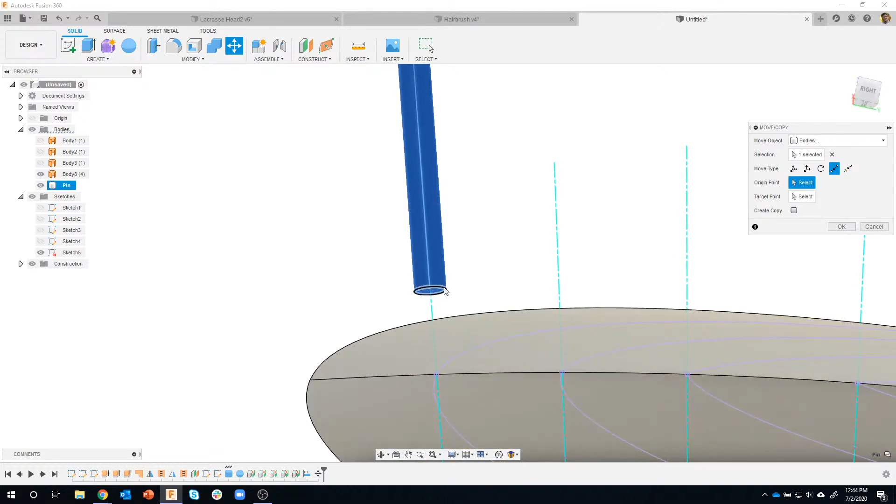Okay, to appease everybody, I could say go from point to point. So I'm going to go from that point there to that point there, and it's going to move that cylinder to that point, okay? And it's going to keep it in line. Or I could do it kind of how this thing is manufactured. I could just drag this down until it intersects, because it actually gets pushed down into the fabric. And I honestly don't really care how far.

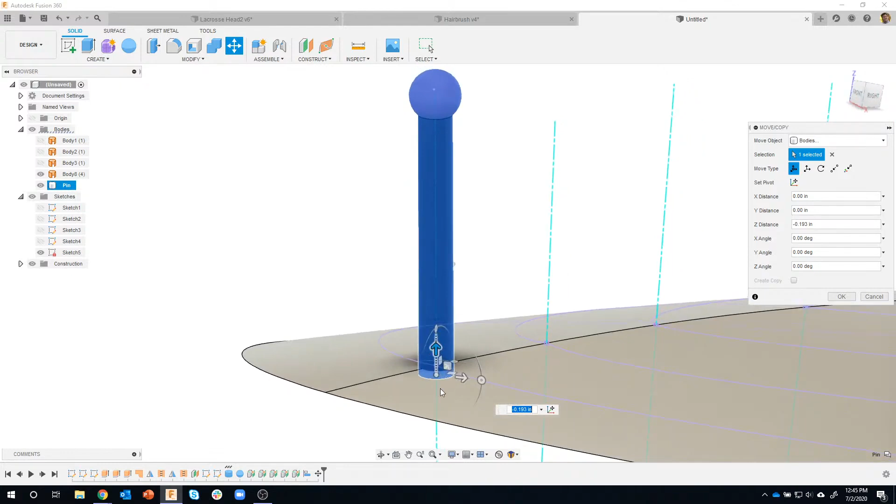Okay, I just want it somehow intersecting this surface, because maybe when I join it later or something like that, I want to make sure that it's going to join. If I just went to the point, it could leave a little gap underneath it that I have to figure out and fill in. So I'm just going to sink it down into this surface just a little bit. And I'm going to go ahead and say okay. Okay, so there we go. We got our first pin.

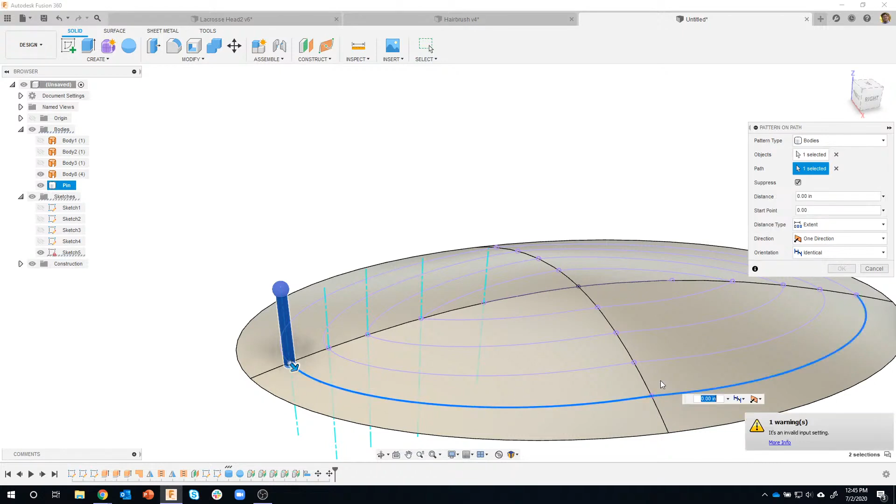Finally, we're going to get to the command that this live stream is all about, and that is pattern on a path. So I've shown rectangular patterns, I've shown circular patterns, but what is this pattern on a path? So I'm going to go ahead and select it. What do I want to pattern? I want to pattern this body, so I'm going to click on that body. Okay. Now it's asking for a path. So I'm going to go ahead and grab this path, like so. And you'll notice it says it's an invalid input setting. Well, that's because it's trying to pattern right on top of itself.

I'm going to go ahead and start to drag this arrow, and you'll see it's giving me a live preview of what this is going to look like. And as I continue around, you can kind of see how it's patterning this along that path. Okay? Okay, so I'm going to come back here. You'll also notice this suppress, and each of these has a little checkbox. It's kind of hard to see. It's kind of buried inside the cylinder right there. But you could say, I want 100 of these, but turn off number 5, number 50, and number 99, for example. So you could suppress those if you want. To speed things up, I'm going to turn that off because I don't want to suppress any of these pins.

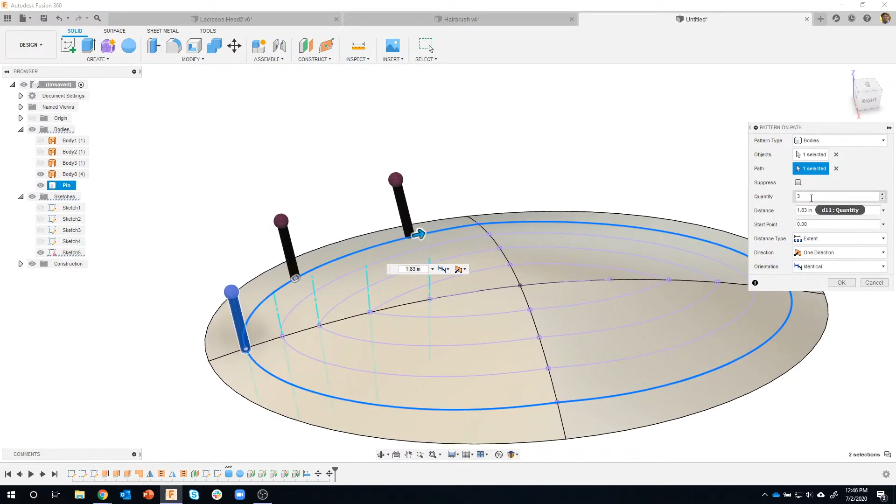And then it's asking for the quantity, okay? And yes, I counted the number of pins on my wife's hairbrush. So I'm going to type in 42 for this outside ring, and notice the preview that I get. So I'm going to go ahead and continue dragging along this path, and you're going to start to see that they start to spread out a little bit more. But you're going to also probably go, whoa, those look really weird. They're all leaning the same direction. And that is right here. This orientation is set to identical. So whatever angle this object is, it's going to keep that angle as it travels along that path.

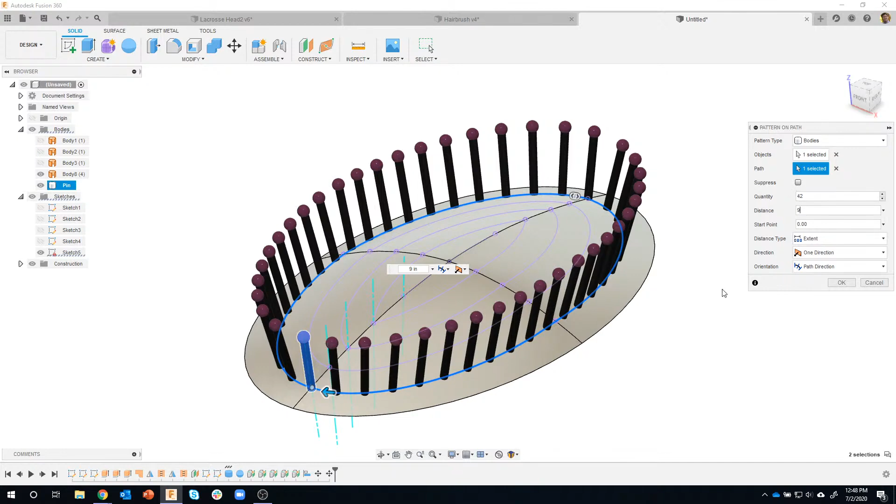Okay? So I'm going to change it from identical to path direction, and notice what we get. It's basically almost like it created an axis at every single location, and these pins are now perpendicular on that path on that surface. I think this is wicked cool. Okay, now I can come in here and adjust the spacing or whatever. I can see we're pretty close to the distance of 9, so I'm going to just type in 9. So I'm basically telling it go 9 inches along that line. I just kind of go visually what looks good. Okay, and I'll say okay. So actually, let me pause here. So we did quantity of 42.

The start point, by default, is going to start right there. But I could say I want it to start over here and then start doing the pattern. But in this case, I want it basically to go 360. That's what that is.

I could also come in here and say I want this to be equally spaced, a 1/4 inch apart or whatever. In this example, I have it set to extent, and that's why it's giving me the total distance, and it's not asking me for spacing or anything like that. And like I said, I usually do this visually in this example.

Okay, so I'm going to say okay, but watch what happens to my browser over here. I get a lot of pins. In fact, there should be 42 of them. There's 41 plus the original. Okay. Now think about this. We're going to do this over and over again. My browser is going to get crazy long and annoying.

So here's a new tip. I'm going to right mouse click on my bodies folder and new group. You can see that it created a folder icon called group 1. I'll just call it ring 1 or something like that. I can rename these. And then I can come in here and shift select all of these guys.

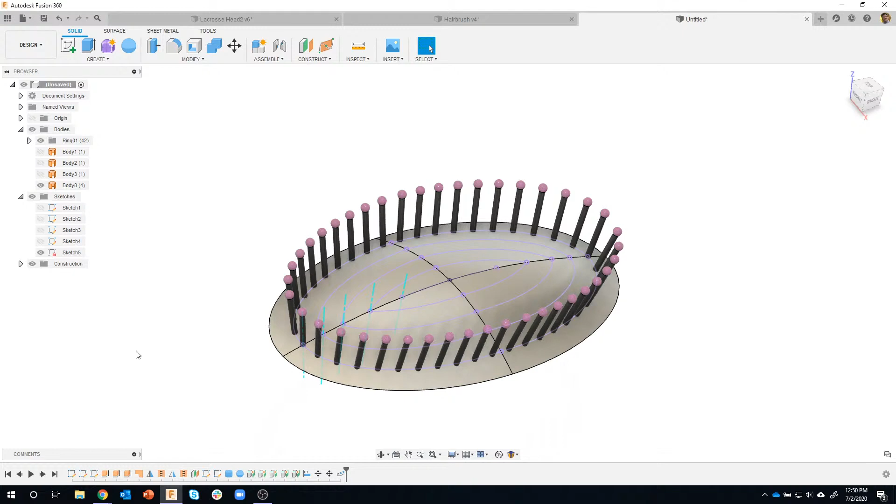And I'm just going to drag and drop those into that folder. Notice it tells me there's 42 bodies inside that folder. If I expand it open, there they are. But if I fold it down, I don't have this huge long list. Okay. So this next part is kind of repetitive. I'm going to do a couple of these and then hopefully stay on time.

So I want to reuse one of these pins and do it on the next path. So I'm going to come in here and say move. I'll click on this original pin right here. Now here's a tip. Before you move it, come down here and say create copy. And then I'm just going to drag this up in space somewhere. I don't care where. And you'll notice it left the original and it's created a copy.

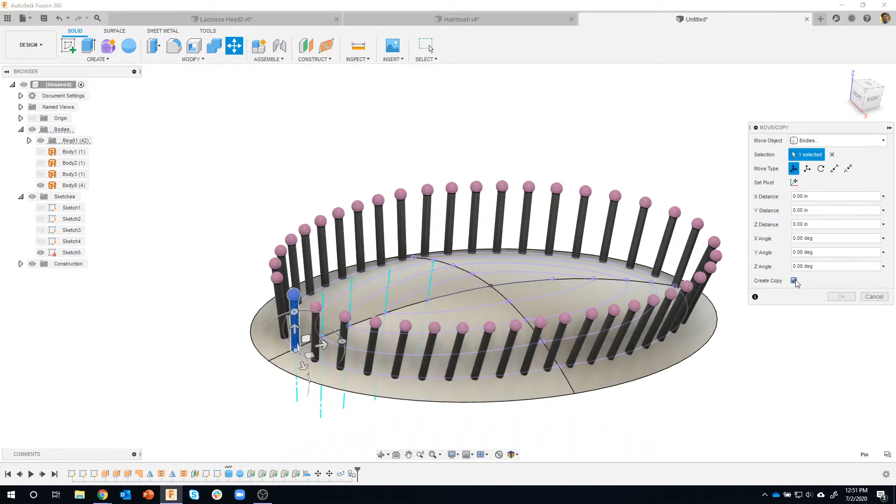Now let me back up and show you why I'm highlighting this. I'm going to say move, click on that guy, and say I want to move it up like so. You'll notice create copy is grayed out. It's basically saying, oh, you want to move it, you don't need to copy it. So the trick there is to select it, say create a copy, and then tell it I want to move that copy.

Okay, so I do that, and this is pretty much exactly what we did. I'm going to say align. I'm going to align this body, and zoom up a little bit so you can see. Let me rotate underneath. Again, it's kind of black, so it's a little hard to see. But I'm going to hover over this edge, and you can see it's catching to the center point of this cylindrical edge.

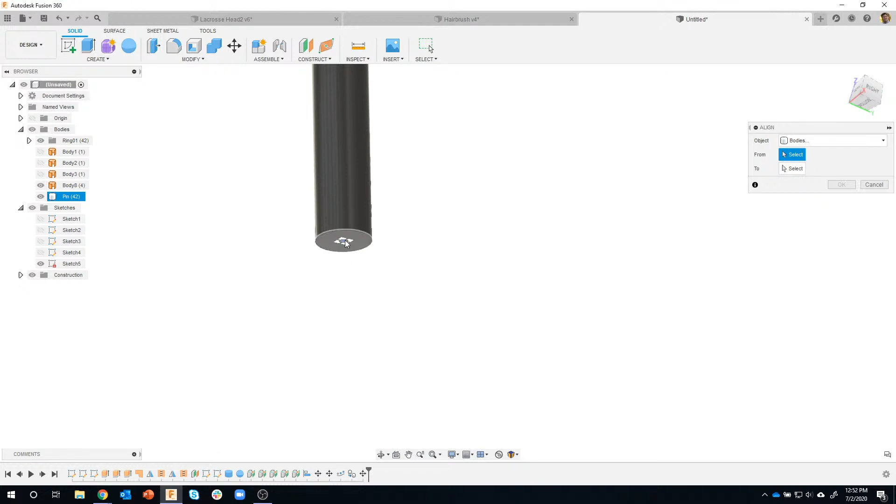Now, be careful because every edge has an end point and a start point, and you can see it grabbed it right there. If I click that, it's not going to give me the result that I want. So take the time to make sure it's grabbing that center point there. I want that lined up with that axis there. You can see it's lined up.

I'll do my move command again. I'll just click on there and drag this guy down. I usually look underneath and try to match it to be fairly close to the other ones there, so they're all about the same height. Okay, so I did that guy.

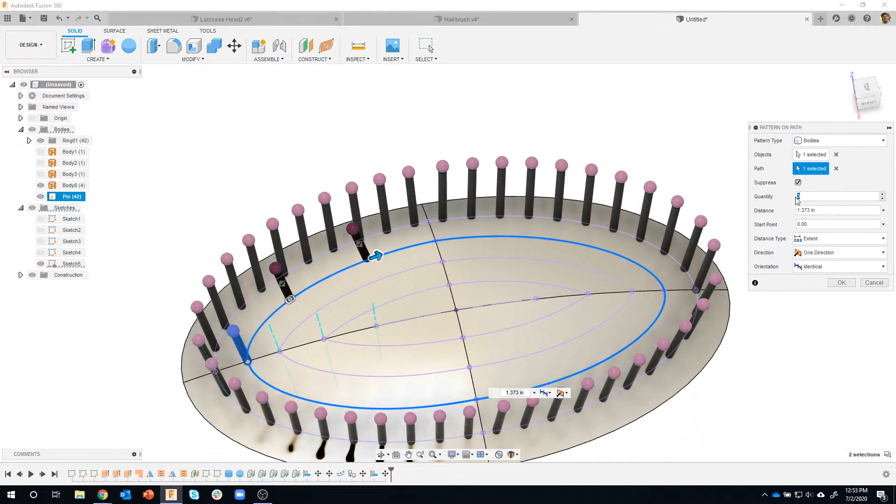Pattern on a path. What body? That body there. What's the path? Like I said, pretty repetitive. I'm gonna grab these 4 paths. I like to start to drag to see the preview. And this next ring is 38, I think, if I'm not mistaken. I'll drag this guy around like so.

Sound effects are optional. And then you can change it from identical to path direction, and you'll see that they all splay out. Now, here's something interesting. Notice this pin is right on that point. As I drag this, you'll see it reorient a little bit as it rotates around. So sometimes I might have to increase the quantity to not have a pin right on an edge or right on a point. So let's make this 39 in this case.

And then I might just drag this closer because I want this spacing. There we go. So you can kind of see it's going to look a little bit nicer as it comes around the corner, for example. So I'll say okay, etc., etc.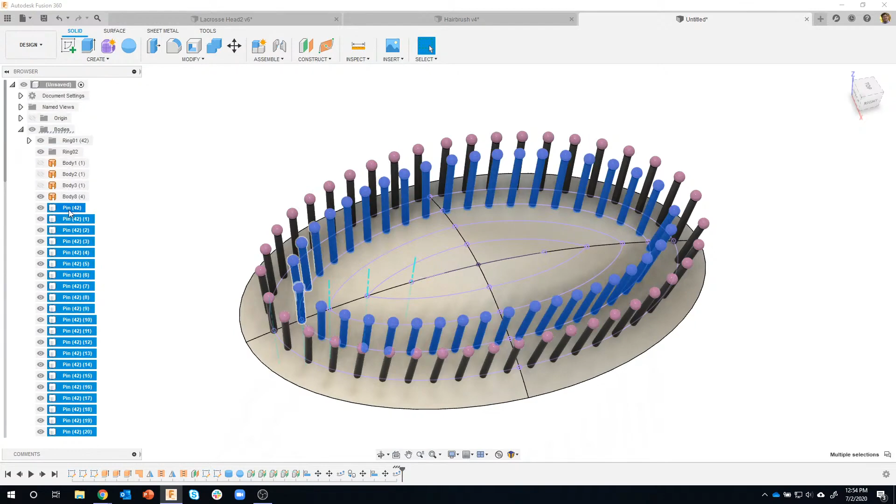I'll do it one more time real quick. So here's all those pins. I'll create a new group, we'll call it ring 02. I'll shift select all of these and drag them into that group. So you can kind of see, it tells me the quantity and all that kind of stuff.

Okay, move. I'm going to move the original one again. I could use this inside one. It really honestly doesn't matter in this case. I just kind of like to know, it's easier to see, it's easier to grab. So I'm going to grab that guy, align, making sure I get that correct edge, not that guy.

Notice how it's on the edge. I want to make sure it's the center. I'll do that guy there. We'll move him in place. Let me drag it down just a little bit.

I know I'm kind of rushing here. I don't want my wife to find out that I stole her hairbrush.

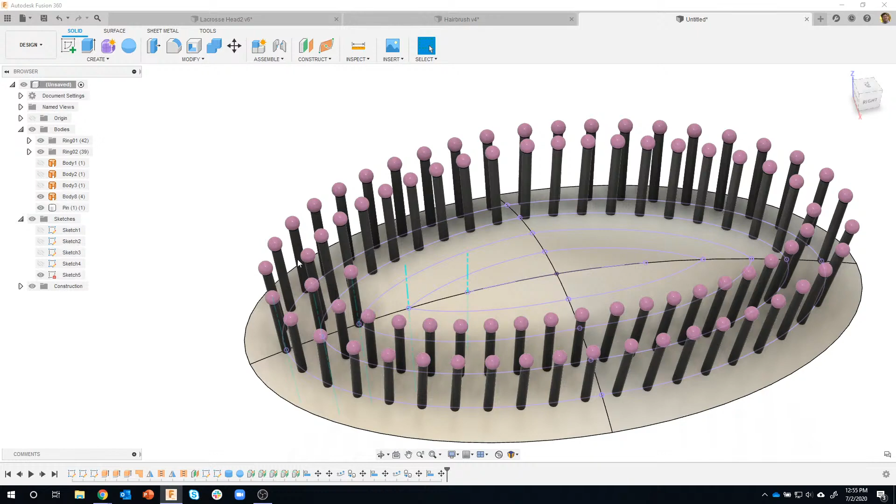Okay, so let's do pattern on a path. Same thing, that body, what's the path? And I do have to select all 4. Now I could just do, you know, right here, and that's as far as it's gonna go. So again, depending on what your path looks like will depend on how far these objects go.

So let's do 30 in this case, like so. Change this to path direction. You kind of see how it splays out. And honestly, how quickly we're building this complex geometry, I think is pretty impressive.

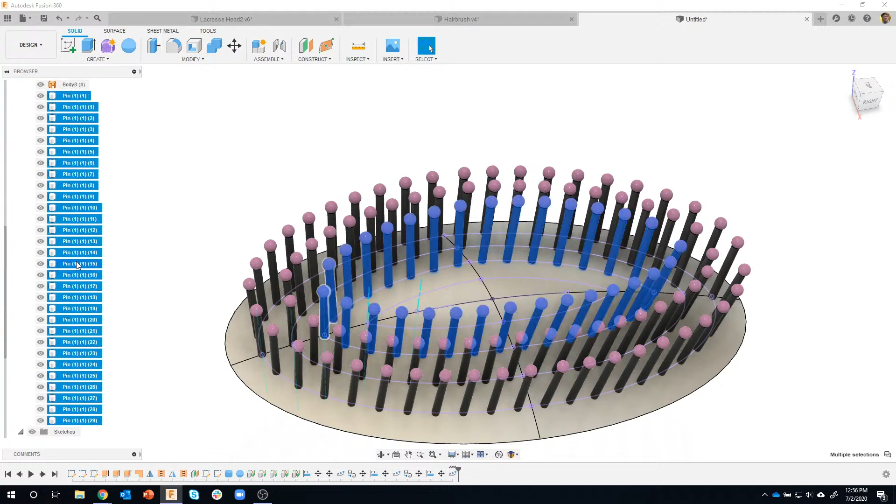So let's just do ring 3. Oops. Put those guys in there.

Move, create copy. Align, I usually zoom up to make sure. And you can kind of see why we created these axes earlier. So I'm clicking on that axis. It's now perfectly lined up. And you'll notice that angle is different than the original angle. So I couldn't just use one axis and hope that it would work. So I kind of captured that information all the way along the path here. So let me do that guy, bring it down.

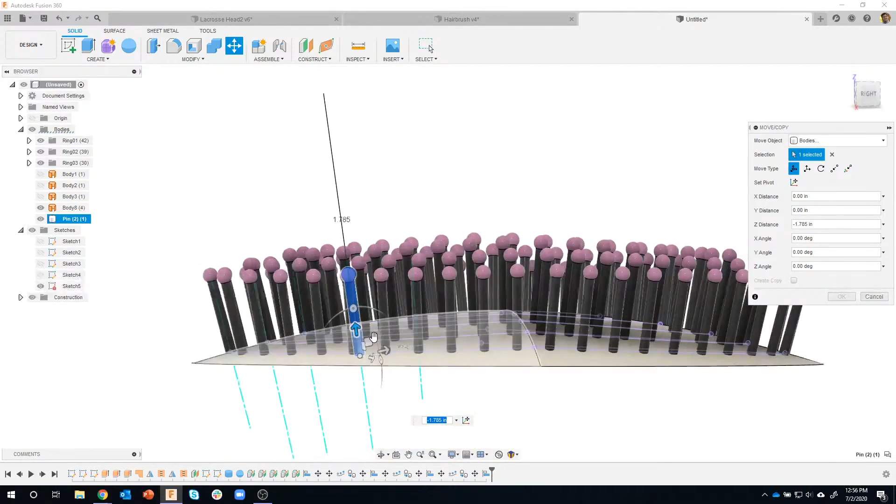And again, like I said, I could have gone point to point to the surface or whatever. I just kind of was thinking, how is this thing actually manufactured? These are like pushed into this fabric and melted or something. I think if you took one apart, you would see that.

Let's do the pattern on a path. And then I'll do the last line for you just to show you how the path doesn't even have to be closed, it can be open. So let's do this path here. And I'll start to drag. I haven't been turning off suppress like I showed earlier, but that's okay. You don't have to, I just think it kind of speeds things up.

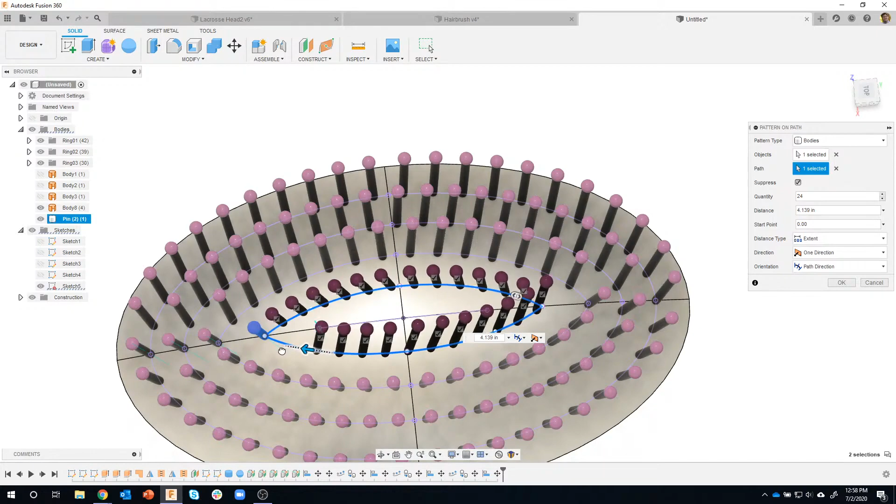So we'll drag around. Path direction. Okay, now sometimes you might get, I guess that is, they're kind of leaning in. Again, it depends on the quality of the path and all that kind of stuff, so you might get some different results. And to me it seems like these are kind of leaning inside a little bit more than I wanted it to, and it could be because of how tight this path is on the corners.

So I might instead set this to maybe like 12 and do this in two separate paths. So you can kind of see, like I could do it on this side like so, doing the path direction, and then I could do it on this side also as a separate one, and that might get me a better result.

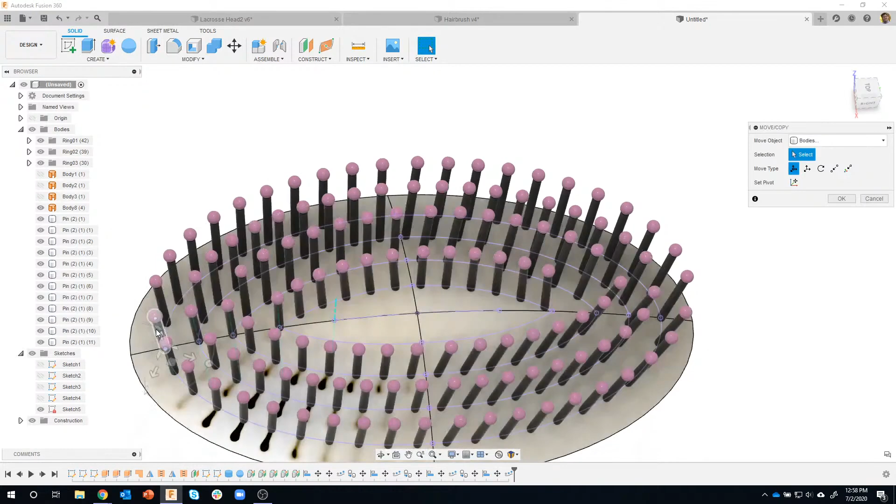Okay, so I'm just gonna leave that and then get to this last pin here. So let me do, let's see, move this guy, copy, drag him out in space somewhere, doesn't matter where, but you do have to align.

And I'll align it with this last axis right here. Move it into place. And you can see once you kind of get the process, it goes pretty quick. Again, think about how long this would take to do manually or whatever. And then create pattern on a path.

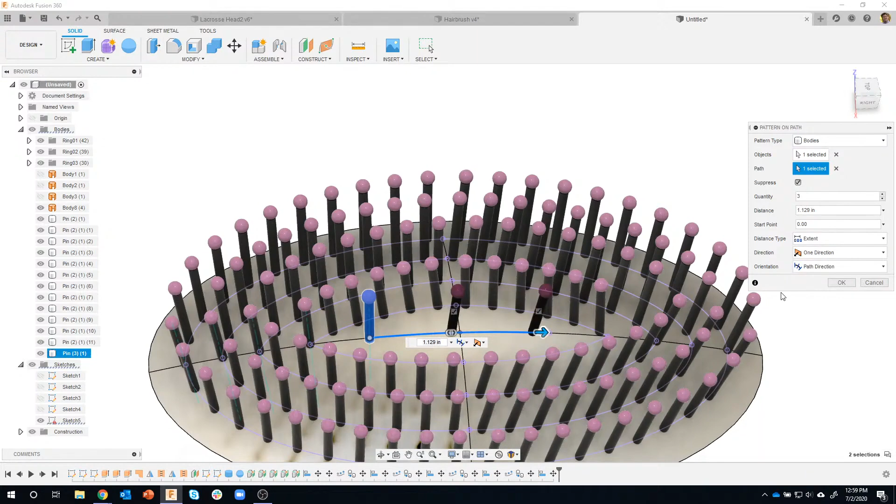What's the path? Let's say this line right here. You can kind of see as I'm dragging that along. I'll say path direction, and you can see how it's following that path direction. In this case it's pretty small, only like 8. I'll go to the end right there, like so. That's the basic idea. I could do this other direction too, but I'll leave that for now since we're running out of time.

I wanted to show another cool command we just added. Let me make one more group here. I'll call it rest, and put all of these guys in here.

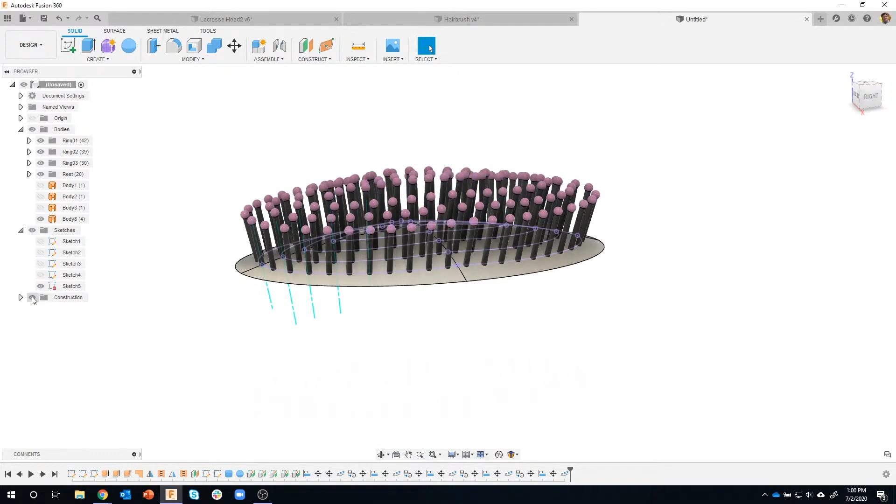We just recently added the ruled surface. This lets you pick a profile, like this guy here, and then specify a distance. In this case it's going normal to this edge, so it's tucking in a little. I can also go tangent to that edge, and if I pulled out that direction, it would basically extend the tangencies of that.

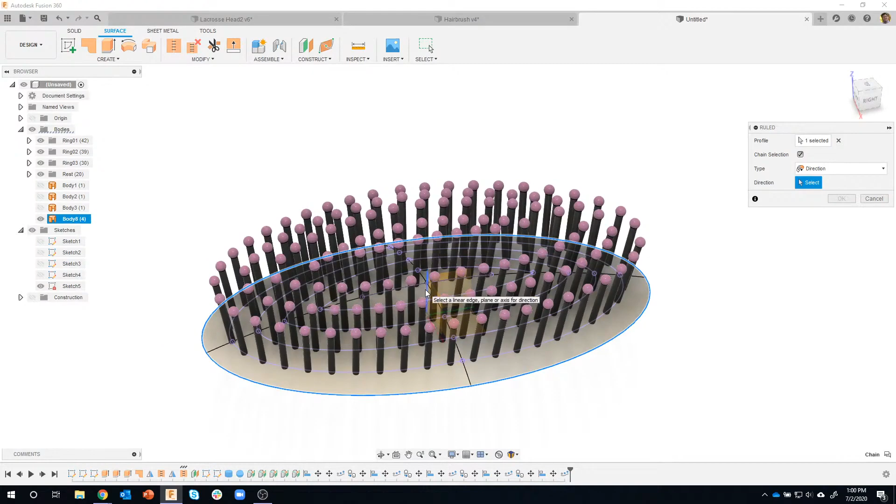Or I could say direction, and it's hard to see because it's buried, but I'm going to click in the Z direction. Now it's taking that edge and allowing me to extrude it as a ruled surface. I'll go down a quarter of an inch in this case.

Now I'm going to turn off that sketch to simplify things. I want to put this surface on the other side. I could say mirror, but my origin is up on this level right here, so I'm going to say plane along a path instead.

What's the path? I'll click on this edge right here. It's going to be hard to see because it's really tiny, but I'll start to drag, and you'll see it snap proportionally halfway. That's what that is right there. I could have also said physical and typed in 0.125, since this is a quarter inch in thickness, but I'm going to say proportional, and it'll snap automatically there.

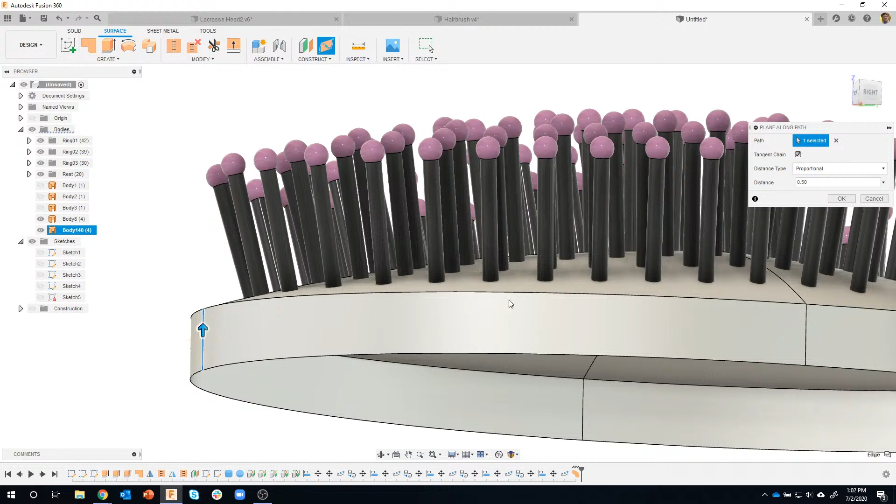I'll say OK, then turn my construction back on so you can see it, and grab the corner to make this a bit bigger so you can see what we did. We just created a plane that's halfway through that line.

Now if I say mirror, what do we want to mirror? I want to mirror that guy. What's my mirror plane? That guy there. Watch what happens when I say OK - it took that surface and mirrored it along that plane to the bottom side.

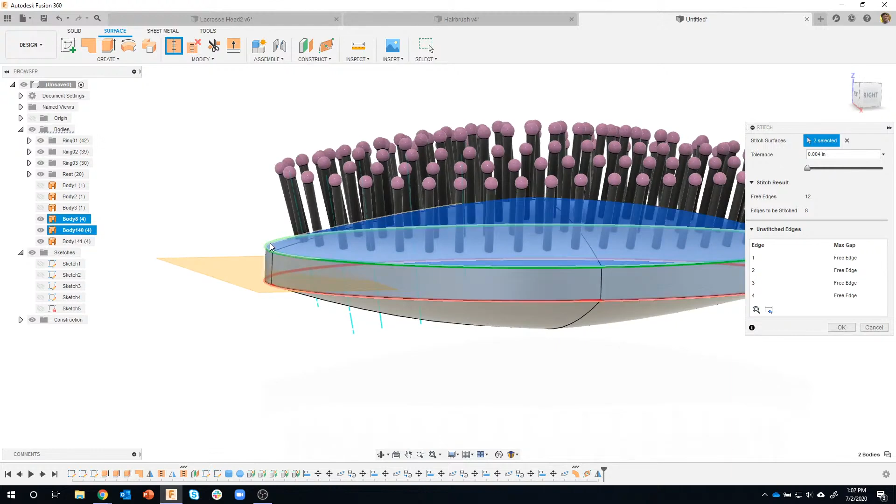But you'll notice I now have 1, 2 separate surfaces - not actual bodies. If I come in and say stitch, that guy, notice the edge turned green, and that guy, notice that edge turned green too. Watch what happens when I say OK - I now have an actual body.

So I'll call it brush head. This is an actual body - I could section through it and all that kind of stuff. I could combine all of these pins into it.

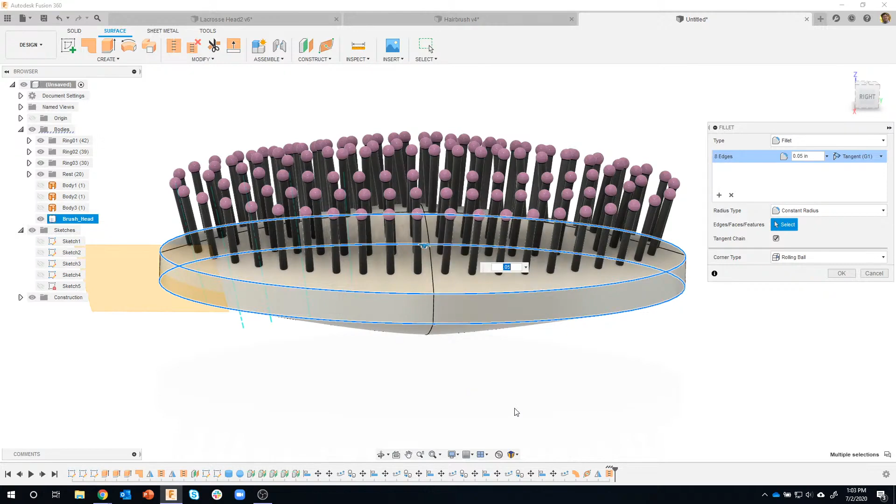I could come in here and just add a quick fillet all the way around. Let me grab all 4 of these edges, and let's do maybe 0.1, or 0.05 like I tried earlier. Let me go with 0.05 - you can see how it's going to fillet all the way around. Let me grab these other edges too - you can see I can even pick through. I'll say OK.

And then finally, maybe we add an appearance - A for appearance. I'll use that black and just drag it onto that body. Now you can see we've got the head of the brush. All we'd have to do now is the handle, for example. So this allowed me to reuse these existing surfaces - I just mirrored them straight down and combined them together basically into a solid body.

Hopefully that gets the gears turning for where you could use pattern on a path - that's why I showed that lacrosse head, a hairbrush. Maybe you're designing a toothbrush with features that go along the curvature. You could use pattern on a path to add those features along a surface or an edge, for example.